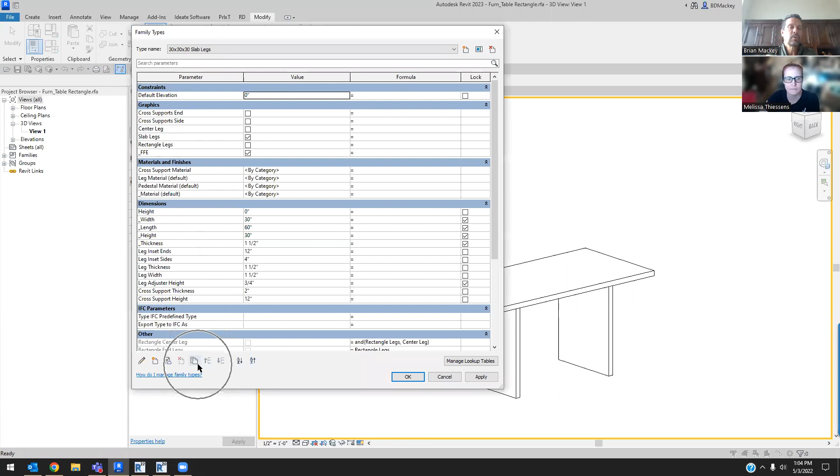So, one of those things is that in the family editor, there's some new things, which is kind of cool to see. Last month, I talked about some of the new features. One of the things that is nice in family types is we do have a couple of new buttons down here. One of those, which I'm really excited about, is duplicate parameter. So if you're like, gee, I just need to go create another dimensional parameter or another visibility parameter, you can just duplicate this and call this, hey, Center Line 2, sure.

Give it a name, but what's cool is it knew it was yes/no, it knew it was grouped under graphics, so you don't have to go through that whole process of new parameter, give it a name, choose the discipline, choose the type of parameter, choose where you want it grouped, was it instance or type? You don't have to do that anymore. Just duplicate parameter, like, hey, what's the new name? I'll put it where I need to put it. So that's been nice as I've been working on some content for some of my clients in 23. Really been liking that one.

The other one is, and Autodesk is still calling this a preview feature, I think. But Autodesk is attempting to take shared parameters and redefine those. And basically they're creating a BIM 360 project for this. So you'll see they're calling it a tech preview. And if you click on this, it's going to go to a BIM 360 project that is your parameter service project that you set up.

So theoretically, you can put all your parameters in the cloud, and then you can actually batch import a whole bunch of those as you go through. So if I go into, I have too many clients. I don't actually think I created any parameters, but inside of here, I can just choose the parameters if they were here. And theoretically, you could grab several of them at once and bring them in. So unlike old shared parameters, you had to do one at a time.

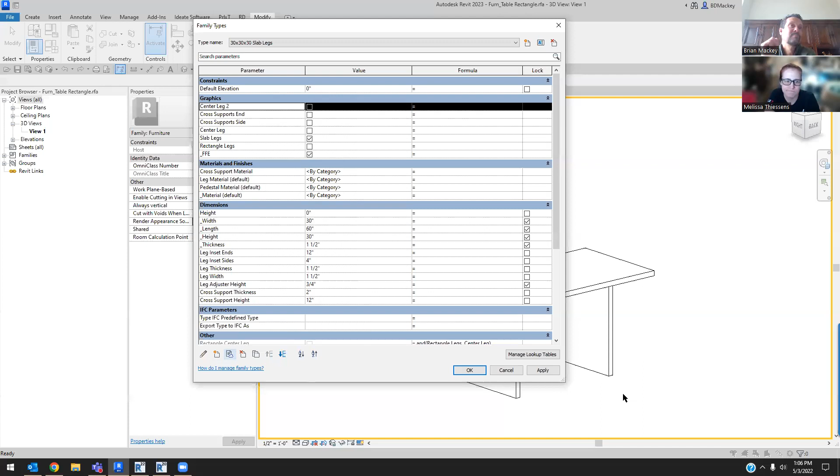You can bring multiples. Right now, that parameter service tech preview is terrible in the fact that you have to define it in there if it's instance or type-based. So basically, if you're like, I want some of my width parameters as instance-based and some of my width parameters as type-based, you literally would have to have width instance, width type. Which I've flat out told the beta, because I've been in the beta on this for a few months, that's just a not going to happen kind of scenario.

Can you upload your current file at least? You can upload your current file to it. Ironically, too, it'll let you create a new parameter of the same name, so you can have 3 different width parameters in there. They don't have to have different names. Yeah, because that's got a different GUID. Again, it's a tech preview, as I air quote, you know, it's a tech preview when you get into that.

The other thing I did want to point out, and I think Paul Aubin is the one who showed me this back in Revit 2019, we've had this enable cutting in views for particular families since 2019. It might have been 2020. It was actually structural connections. When they introduced structural connections, they gave us this capability to make this family cuttable in view or not cuttable in view, right? So historically, and this is an old furniture family that I've got set up, furniture families were not cuttable. So if I go open up this old family that I've upgraded to 2023, this is unchecked because it had not historically been able to be cut in views. But now we have the capability to say, yes, if somebody sections through this table, I want to see it as a section, not as an end or side elevation, right?

So that was something they opened up in 19. I don't think they did anything with it in 20. It might have been they opened it in 20. I forget when structural connections came out. But in 2022, they added a few new categories that had it. But in 2023, they've added the capability to add that to it. So if you are just like, hey, I'm going to go upgrade my library to 2023, there might be some edits you want to do looking at the enable cutting in view if that's something you're looking for, right?

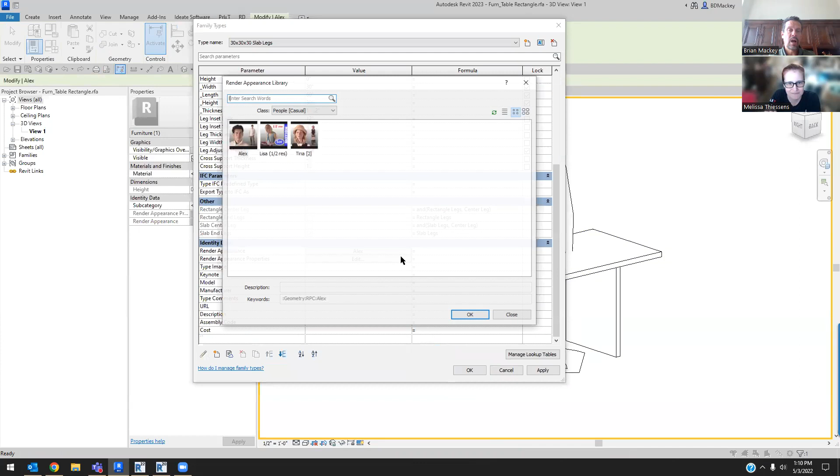So even though I'm in the furniture family, you can see I've got this little entourage family, and it automatically sets it up as render appearances, and it automatically associates those to a parameter where you can say, no, I don't want you to render it as Alex, I probably want you to render this as a furniture, a coffee table, sweet. And then you can start playing with some of the properties.

There's stuff on that from Enscape and things, right? Yeah, I think Enscape does it slightly different, because Enscape has a tool called the Enscape Asset ID. And therefore, when you go to render, if there's a parameter called Enscape Asset ID, it'll go browse to whatever unique code the Enscape asset had. So yeah, it's kind of weird.

And as Simon said, RPCs have been out for a very long time, and it's really, really difficult to create your own RPCs. You can do it. I know CTC for a while was creating their own RPC content. CTC tools were mostly people and stuff. So yeah, there's a capability to do it. And even Enscape allows you to create your own RPC content for rendering purposes. So it can be done, but it's definitely not simple to do.

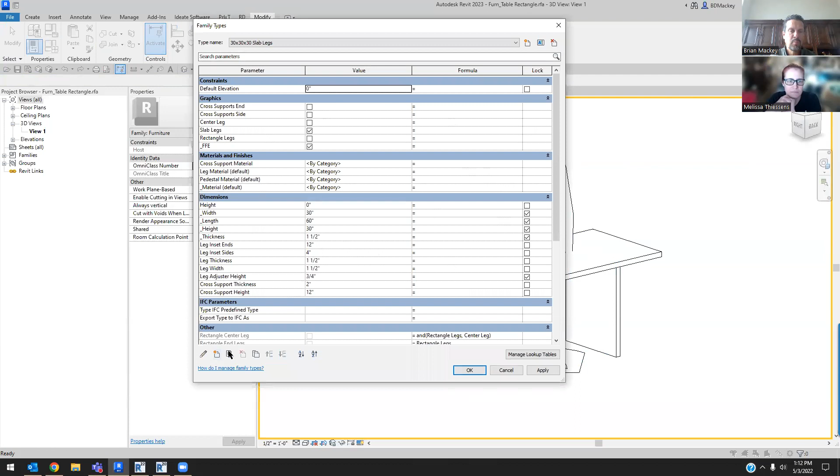Most people go into families and they start looking at the family types and new parameters, new buttons down here, etc. Just want to point out that you might have new properties just in the overall properties of the content itself. So start playing through and looking at that when you get into it as well.

While we're looking at this family, it occurs to me that on the list, there's the fact that we can see filled regions in 3D now. Oh, the fact that we can create. I think it was more the fact that you can actually create filled regions. So in our model families, we've only ever been able to do masking, hence why we always nested detail items. So we can now do filled regions inside of here. So if I wanted to get rid of the table rectangle, I could do my own filled region in here.

The other thing that is new is a type property. In the type property of the filled region, for the foreground pattern only, you can create a parameter for that. Okay, so you can decide how you're going to do this, right? So you could have a detail, I keep saying detail components.

We've all seen my detail components sessions, that I could literally just have one called my line-based family, and I could swap out the hatch pattern to concrete, to gypsum board, to whatever, and I could have one family that would be all-encompassing of everything, and literally it's just swapping out the foreground pattern. Doubt I'm going to go down that path, but this is something they gave us, and I have no idea why. I mean, what large company had been requesting this? Autodesk said, okay, we'll give that to you. I would much rather be able to swap out a profile family than swap out a fill pattern, but whatever.

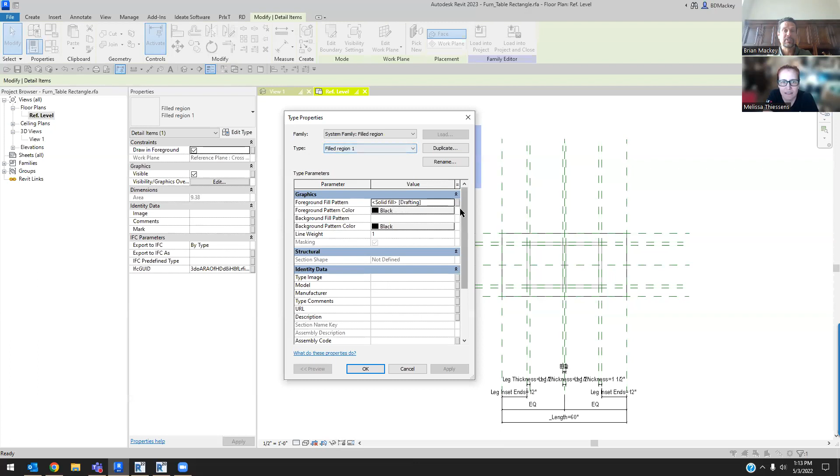Yeah. Yeah, so I thought that was pretty bizarre that you actually could come in here and change the solid fill, or change the fill pattern. So you can now just in your family call it filled region, give it a parameter and change it out if you wanted to. I've never been in a situation where I'm like, oh God, wish I could have one family and swap out that fill pattern.

And the only time I ever had that was I'd created a detail component for one client who wanted all the different bar sizes to be a different color. And I tried suggesting just use filters in the project, but they wanted it in the family itself. So if I could have just had that and then just changed the one pattern there, as opposed to literally I drew a filled region for every size, 10M, 15M, 20M, 30M, I had like 19 filled regions on top of each other, this would have been that scenario. But that is the only scenario I can think of where I'm like, oh, this really needs to be something that I want to do.

It looks like there were some comments that came up on what I was talking about. So is it Carrie or is it Garfield? Yeah, we're just going to say Carrie.

Is there an advantage of using a generic asset material versus a non-generic material? Oh, okay. That does not help self-illumination, etc. So I think what he's talking about is when you go to the materials, and I don't know, Melissa, do you have a thought process on this? When you start looking at materials, you're going to see that you've got these materials with these little crazy little triangles on them. Yeah, the old stuff. And this is the old materials. Ironically, all the Enscape users say they like these materials better. So I know a lot of the people doing Enscape use these old materials, but if I come down here and go to the AEC materials and I just load up a new one, you're going to see that this new one doesn't have the little triangle because this isn't any longer one of the, I forget what they're calling it. They call them like layer-based versus, I don't remember.

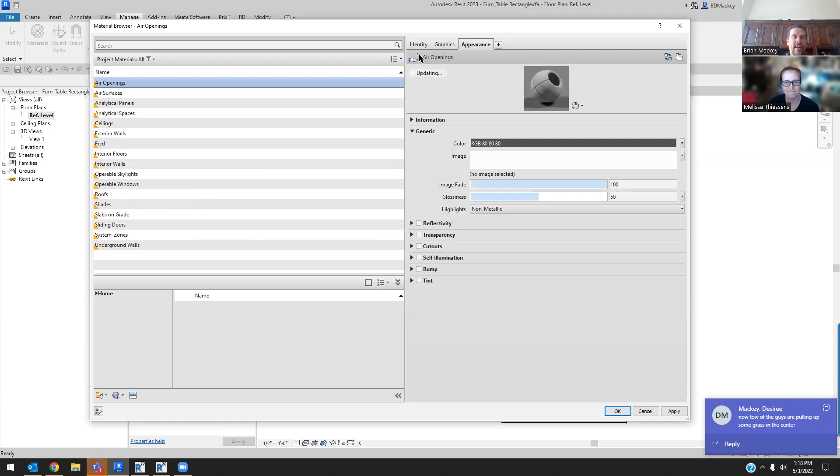Since we're on materials, one of the 2023 features that Simon just put up there: it used to be that when you duplicated a material, it would duplicate it using shared assets. In 2023 they've given us the capability to actually duplicate the asset too. If I come down here to Air Openings, you'll see it has a little hand icon and no other assets are using this render appearance. Before, when you duplicated it, it basically shared the asset. So if I call this one Fred, you'd have no idea that this air opening is tied to another asset that renders the same way. If you changed it to render red, you wouldn't just fix Air Openings, you'd also change Fred. So that's one of the new features in 2023.

Learned that the hard way, right? Oh yes, I've had several clients say, I go to render and it changes, and then I go to the other room and it's changed back. What's going on? It's because you're changing shared render assets. So yeah, this is there.

So now you can duplicate the material and the asset together. You'll see I've got Air Opening parentheses 1, even though it's Fred 1 down here. So it does duplicate the asset, as opposed to us having to come up here and separately duplicate the asset ourselves. That was something new since we were on that materials topic in 2023.

Yeah, no, that is fantastic. That's always so confusing to try to explain to new users. Sarah just yesterday had to deal with somebody doing this. Yeah, I deal with it on a weekly basis.

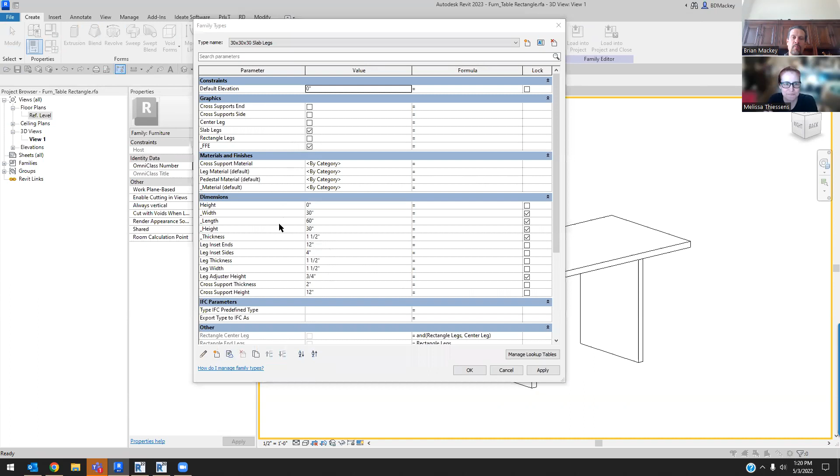So you're an architect, because if you were a structural or mechanical engineer, you would absolutely know what these did. When creating a new parameter, there's this discipline setting. Common is what everybody can use, but if you come down to structural, you can see all these different types of structural options. It's a good question, Rick, because I've been to so many structural engineer offices where they create a number value parameter because they want to put values in kips, and they're like, oh, I didn't know there was a structural option, so they leave it as common.

They make their parameter a number parameter and just start typing things in, and then I get asked, well, it'd be really nice if we could just have it say 'kip' or a 'k' after it. You can. When you switch it to the proper discipline, you can then come down here and, say, go to Force, and start looking at the formatting - this is going to be linear kips, this is going to be whatever. You start changing all the different values here, and then you can use those formulas as you get into it.

There's the weight value down here for warping constant, there's MEP stuff which I have no idea what any of it means on the MEP side, but this is how you get to your airflow, your density, et cetera. So this is what the discipline field is for.

What was that, Melissa? I have at least some idea on some of those.

Airflow, I feel like you know what airflow is? Airflow density? Nope, don't know any of that. What to use it for, but it's never what it is, right? Yeah, that's what's funny. I'm always flow per power. I'm gonna start using that in all the things. Flow per power. Yeah, agreed.

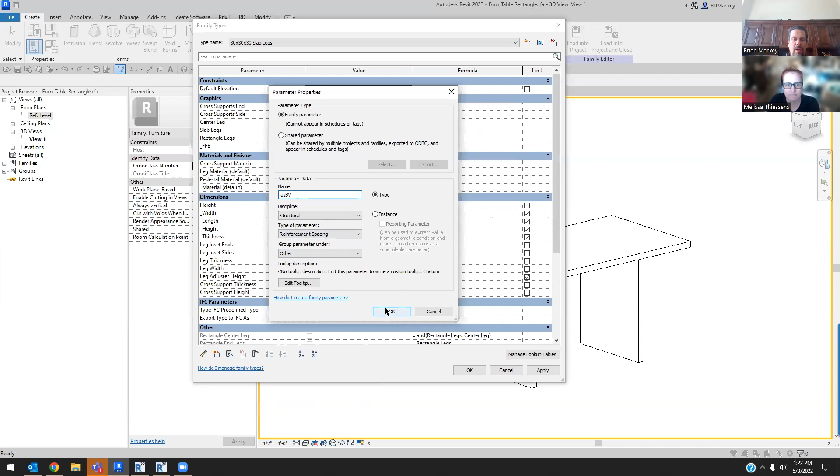So one of the ones for me, I think also under structural, you have something for reinforcement, if I recall, so you can get reinforcement area. I had one client who was just trying to do reinforcement spacing, that's one of the values you can put inside of there, and that's my parameter name. Now when I come down here for this, it looks like dimensions, etc., but the nice part is it's going to be similar to a length value, but this can be used in formulas in different ways. So that is what that stood for, Rick.

So does that tie into the discipline in your view settings? No, not in any way, shape, or form. Okay, just thought I'd throw that out there too.

When he first asked that I thought he might be, and so I do want to point this out. It's not necessarily discipline, but when I first read Rick's question there are certain tools, and I'm not sure if there are any in the MEP, that actually have this up here, which is really bizarre. So if you're a structural engineer, if you come up here and look at the materials for model behavior, you can assign a concrete material to an object, but you can come up here and say this is steel.

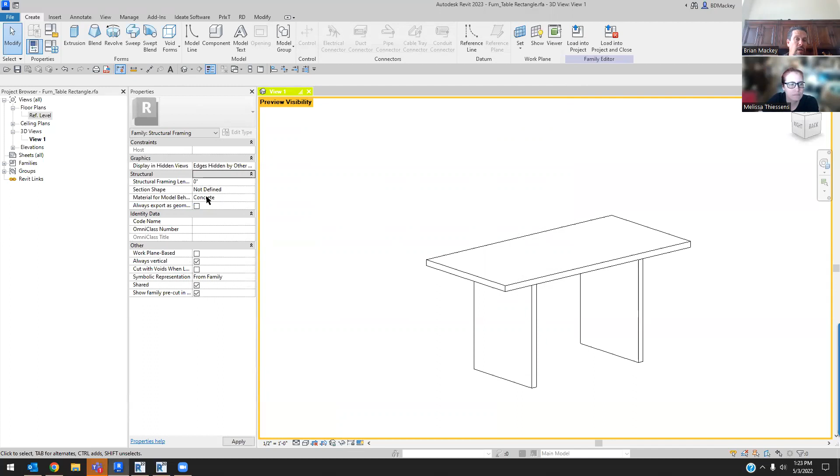So for all these structural families, you see this material for model behavior. This is how, A, join conditions are going to happen between beams and beams or beams and columns. But B, if you leave it as other or concrete, once you do it as concrete, A, you might get a different tool up here. Like now I've got Display in Hidden Views, but also it'll now allow rebar or reinforcement to be placed into it. So a lot of those different things start happening, and you can see just by changing the material here, I'm getting different properties as I go through looking at this family.

The other thing that becomes really bizarre is if I make this steel, then it asks for a section shape. So if you're a structural engineer and you're trying to use any of the steel connections tools, if you don't define what that structural shape is going to be here, these structural connections will not work. And once you choose one of the ones in here, let's just do a...

That one, C-channel Sloped Flange shape. Once you do this, it then automatically associates all of these parameters in there. So these structural parameters were not in here before, and it does need to use those tools for these structural connections. And from what I've been told, it uses all of these values when exporting out to analytical programs too. That I don't know, but that's what I've been told.

So depending on what you do in certain things, they can even add a crap ton of different properties over here, again just based on what you see and what you're changing out over here. I think there's some tools similar to that in the MEP families as well. Could be incorrect, but I believe I've seen some of those.

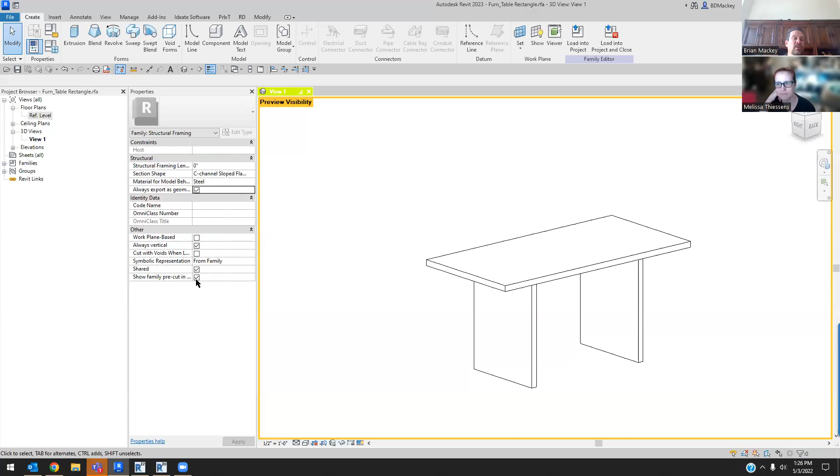This is a bizarre parameter in structural content, and there's something similar architecturally - I think when you start doing multiple nests of doors it acts the same way. But what this actually does: take cross bracing or a slanted column. 'Show family pre-cut in plan' means it won't show the family cut where it's physically cut in the 3D model, but where the view range is set inside this family. So if you have a structural beam or column sloping and want to see where it hits the ground, you need to go into the family, go to view range, and set it to something like half an inch. Because if your view range is at 1 foot, 4 feet, or 6 feet, that's where it will show the slanted column cut, wherever the view range in this family is set. It's bizarre because nothing tells you that - the tooltip just says 'cut plane: either the family or the view,' which doesn't explain anything. That's what it actually means, and by default it's turned on.

So many times I get, like you said, somebody puts a cross brace in and it shows incorrectly, and everybody asks why it's showing way up here when I'm cutting through it right here. It's that stupid 'show family pre-cut in plan view' checkbox.

Yeah, we kept getting red lines saying you can't have a door here because there's a column. No, really, the column is up here and the door's down here - up here and down there. I promise, here's the elevation. Yeah. Cool, good times, right?

Let's see, doors, stairs, okay, we'll go with this one. So this one is looking for a quicker way to make a laser cut air terminal that is also an LED light fixture in a family.

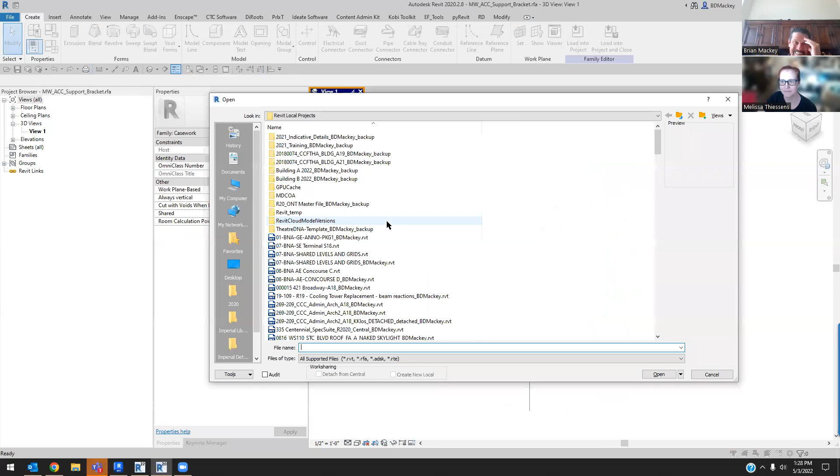Oh, I have one of those. Well, there you go. Now I just got to remember it won't be done in 2023, so I'll go to 2020. Now I just got to remember what the client name was for that - when you get into that, it's going to be nested families. Oh my goodness, what was the client name? It's not that I don't know where it is, I just don't remember the client name for this. Yeah, it's fun when they all start kind of blending. You're just name dropping and showing off. Oh no, I'm not. Was it these guys? Nope.

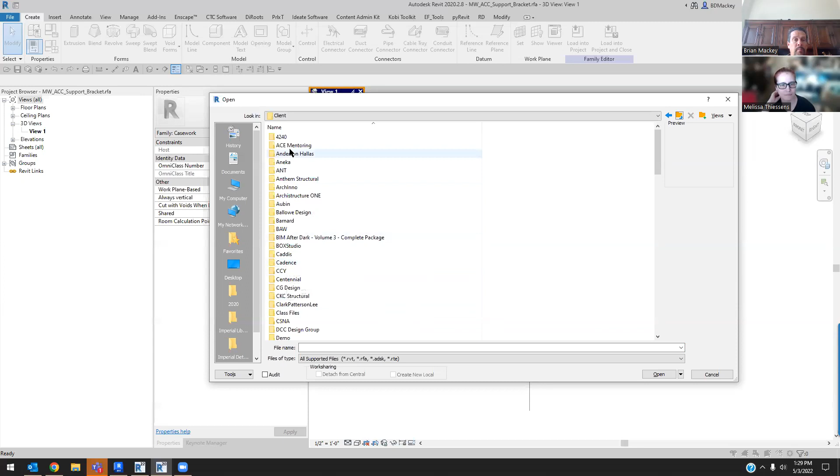I don't remember, but basically what ended up happening is I went through and created a light fixture family that I then nested into my diffuser family. So the light fixture family itself was a shared family - I had the shared checkbox checked. So when it got nested into another family, it would still schedule and do everything it's supposed to do.

I have a whole... that's not right, is it? No. I can't think of who it was.

I hate that when you go back, it doesn't take you where you were. Well, I can't find the family - I have a family for those. Actually, I have a whole entire exam room for it.

So yeah, when you get into that, that's exactly what you need to do - create your light fixture family, then nest that light fixture family into it. Mine, I believe, had a length value because they had LED all along the outside of that air terminal. It went into a whole exam room when you got into it. So yeah, I just can't remember what client I did that for.

Well, that would make too much sense. Synergy, yeah, that's who it is. Huh, you'd think the word 'medical' would help. Let me find the family now.

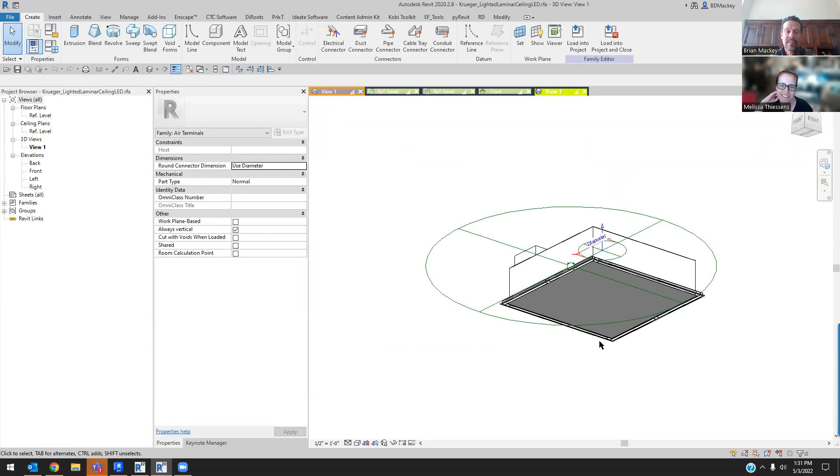Not the lighted laminar ceiling. Yeah, I think it's this one. See, it's been a few years, so it's not terrible. From Revit 17. Yeah, so if you get into this one, I think this is what you're talking about. So this is obviously the diffuser. I even put some sort of hatch pattern to look like a diffuser pattern.

And then this is a nested family. So if you look at this, this is my LED light strip that went inside of here. So if I edit this family, this is my LED family. It's shared, right? And if I go to a floor plan, it's just got the length parameter here. So I've got a length and I've got my little depth and did whatever I needed to do for this. And then that was loaded into this family.

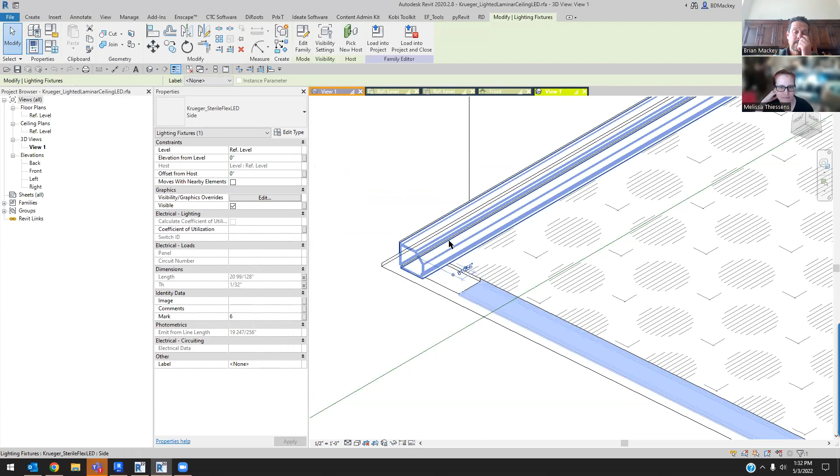When I loaded it into this family, that length parameter was a type parameter. I don't remember why I did that here, but it's a type parameter. And so you'll see in that type parameter, where's length? No, actually, it's got to be instance-based because it's shared. It's got to be here. So sorry, here we go. Here's the length parameter. And then that length parameter I mapped to a formula that said, hey, here's the end length. And then there were going to be side lengths as well, right? So it just kind of went through and mapped into all of those.

Since those were also shared, they do have a light source. So this is true of any light fixture. If you're trying to create, for lack of better terms, a track light or a multi-segment or multi-piece pendant light, the pendant itself needs to be a nested shared family. So when you load it into a family that has 5 or 6 of those, every single one of those has a light source. So that's kind of it. And I still just made this as my diffuser.

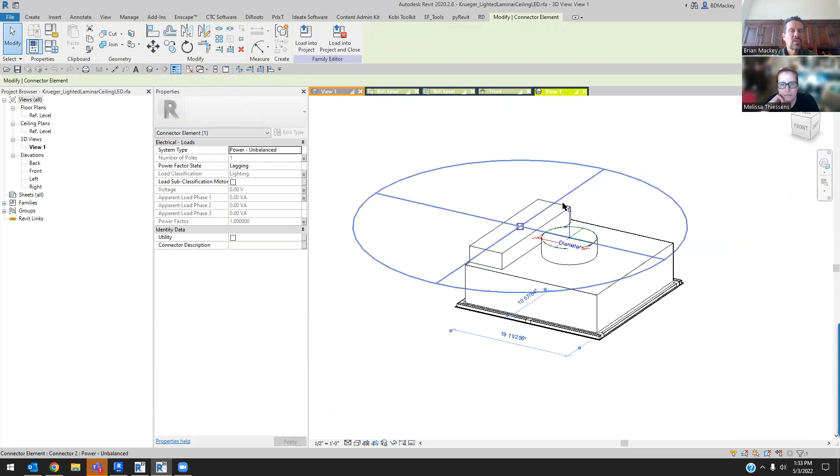I do believe that this even had a connector on it. I just don't believe the connector was showing. So we could still hook that up to the electrical as well. Or maybe, no, I think they said they didn't want that in this one. I think one of these is just my electrical connector. So you've got the diffuser connector, and then inside of this family I did the one electrical connector because that's how this fixture was set up. So I didn't put any connectors in the LED strip, but I did put just one connector in here to represent that and set it all up according to how I was told, because I don't understand any of that.

Airflow. It did, yeah. I even got to use an airflow parameter and all of those fun parameters. See, it comes full circle. Look, I've got my flow, all of those fun things inside of there. So hopefully, Garfield, that answers your question. All right.

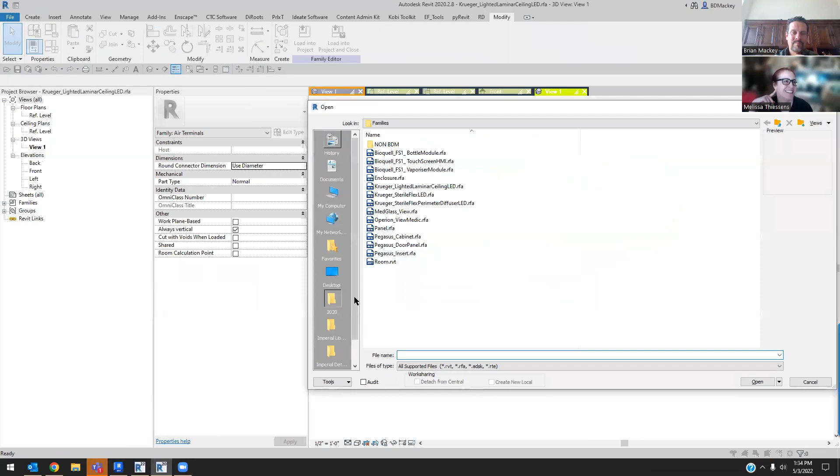So let's go to a kind of stair problem. Do you have any advice for adding a ceiling, like a drywall ceiling, to the underside of stairs easily, other than manually figuring out slope or top and bottom height for a slope arrow? Yeah, personally for me now, the biggest thing is if you are trying to use quantity takeoffs, now this might be fixed in 2023, I honestly can't remember if it was or not. But for me, when I do this, it's a handrail.

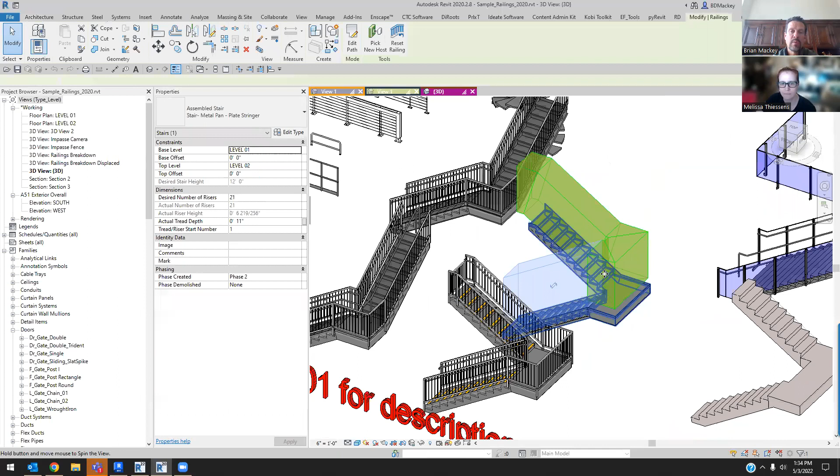So this is one of the things that when I'm talking to people, everybody's thinking a handrail is something that just starts going up. A lot of you have probably seen this sample handrail file. I get into it quite often. One of the handrail types I have is basically one that gives me head clearance, right? So this one I can put a handrail on just to verify, do I have the proper head clearance?

Well, there's no difference between this handrail and my handrail underneath this stair, other than the fact that this one's got a different material and it's only 5/8 of an inch thick. So this way, when I go through and do it, this is just simply a handrail. It will follow the slope of the stairs automatically. You'll see it's a railing, it's called gypsum.

If I go to the type properties of this, it's 5/8 of an inch thick. It's got a rail structure where I've said, hey, I've got to figure out the height of this for the profile offset to match, to get that rail from the top of the stringer to the bottom of the stringer. So there is a property set you've got to play with in here. And then it's just using a profile that's 5/8 of an inch by however wide my stair is, and then a material called gypsum board, right?

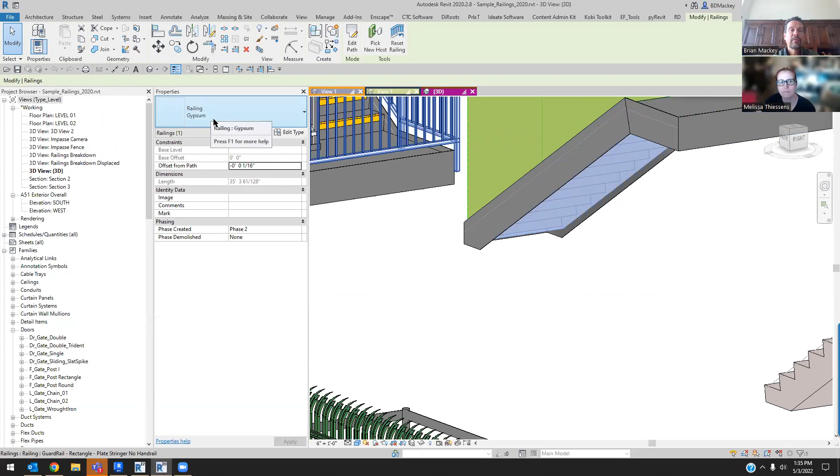So if I had a 4-foot wide stair and a 6-foot wide stair and an 8-foot wide stair, I would have my gypsum 3-foot, 4-foot, 6-foot, whatever. Each one of those would need to be a different height. But you'll see that I do it as a handrail. And if I do come through here and look at this, you can see that it does go all the way up. I will end up with weird miter lines like here and here. I don't know why, it's the handrail trying to miter around, so it gives those to you.

It's still flat, so it's just bizarre that it actually draws a line in there, but if I'm in an RCP or wherever else I'm doing, then I just use the invisible line tool. Kind of a downside. Now, the other thing that you may have to do, depending on the design of your stair, is if I edit the path for this handrail, you'll see that some of these need to have a height correction. So this one has a height correction of 3 inches.

This one doesn't have a height correction, right? So that negative 10.5 or whatever the value was in the offset of the profile got me to the underneath side of the stringer. But once I got to landings, it wasn't the right height. So you can grab individual sketch modes if you need to and change it from by type on the height correction to custom. And it looks like the only one I had to do that on was this one here. So I just did custom on this one.

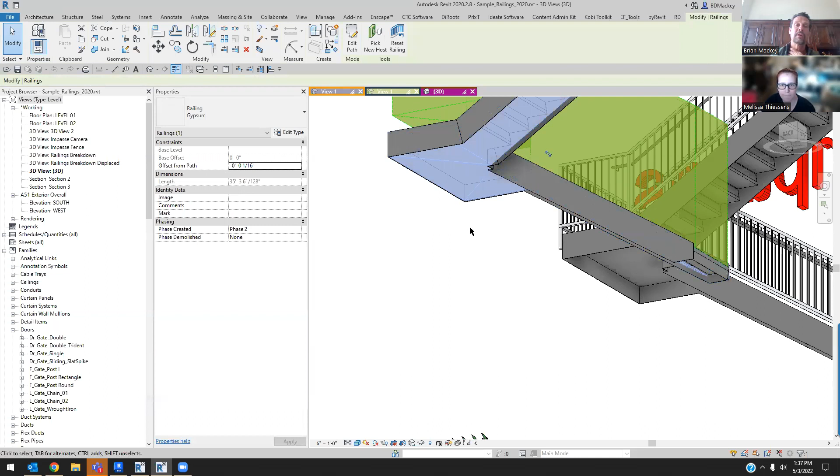Downside to this, it will not schedule quantities. So if you're trying to get your gypsum board takeoff in quantities or whatever, it will not do that for you. 2023, I can't remember if they allowed materials to be scheduled from handrails. They added so many things I can do to schedule, I forget if this was going to be on there or not. So just a heads up, it may work in 23, but prior to that, it definitely did not do scheduling. It'll look pretty, right, when you're walking around.

But it looks pretty. You get the great rendering. You know, I made it go inside my stringers. I've done this for several clients where it's more of a residential and it's just a 2x stringer and they put it underneath and outside. So yeah, like I said, the only downside is you might have to play with that height offset correction.

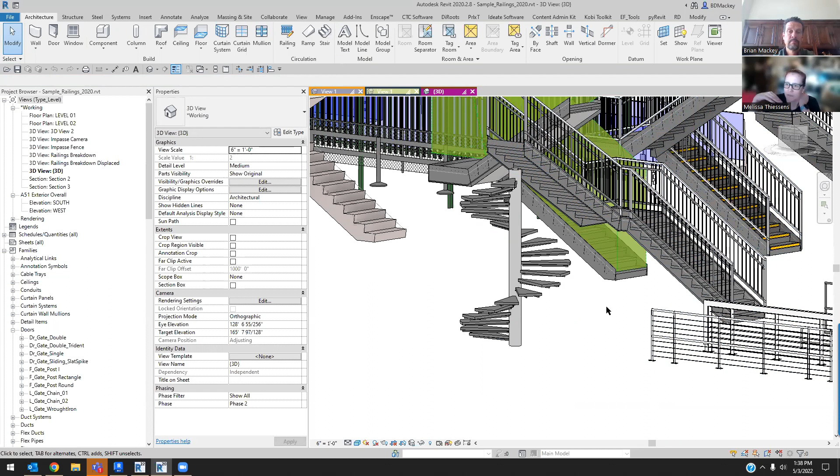But again, cut a section, do a distance, edit the path, put that value in there, you're done. So it's not like it's rocket science, and then I don't have to figure out all the goddamn slope arrows and try to do this in sloped ceilings anyway. Much easier in my personal opinion, just to do it as handrail. And then as a railing, you could also, if you have a multi-story stair, right? Yes, so there's a railing. If I did a multi-story stair, it would do the multi-story railing with this.

I'm not a big multi-story railing person or stair person, so. It's better than it used to be. Better than it used to be, and it's great for schematic design and design development, but rarely do I keep those when I end up getting into construction documents, because there's just usually nuances at every damn floor that I need to play with.

Just since you're on the stairs, I was just trying to figure out, so it looks like you didn't start with a tread on your second run. I'm just wondering, because a lot of times when I do those stairs, I will just slip the tread.

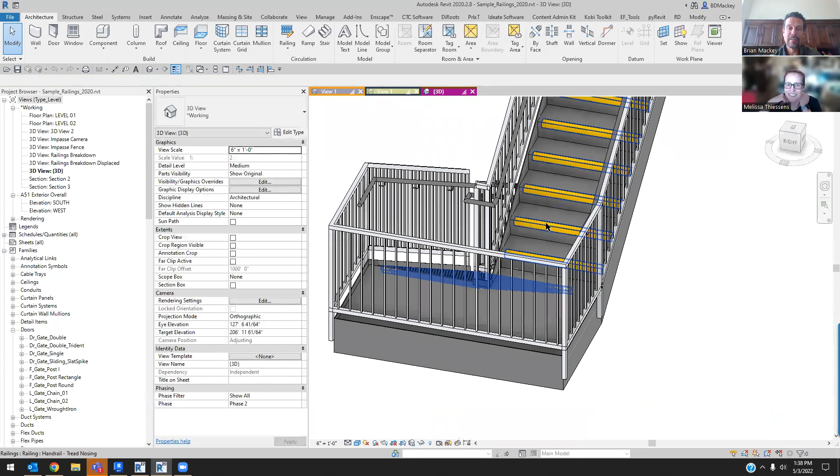Oh yeah, so use the tool that nobody knows, that when you tab select to get a run, or when you're creating the run, you have that. Begin and end with riser thing. Yeah, you have this checkbox over here that is begin or end with risers. Like up here, you can see I did not end with a riser. I did make this just be flat rather than having a riser go up. You do have that while you're modeling a new stair.

So if you're in the stair command, and this is one that I think must have been editing path of a handrail somewhere. So when you're in the stair command and you start drawing a run, I think one of the things, come on.

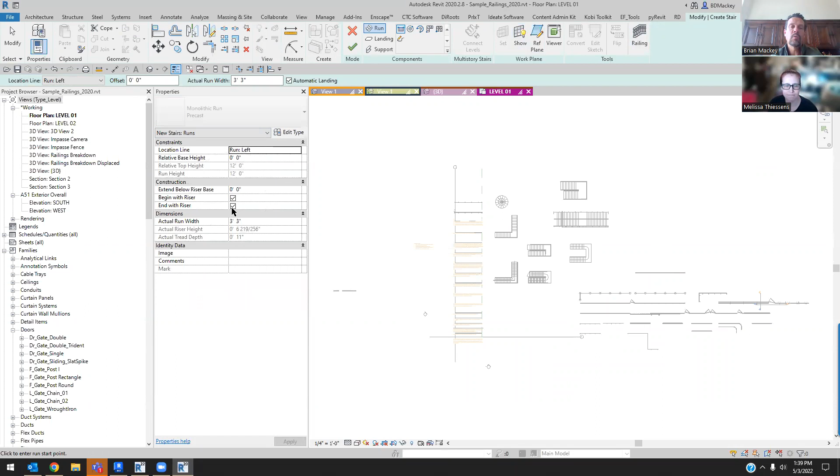One of the things I don't think people understand is when you're doing a stair, the properties you see is the overall stair, but you can also see it of each individual run. So you can choose to begin or end with that riser on each individual run as you go through. So most people don't ever hit the properties filter over here, but you have that capability, like, oh, sure, I don't want to start or end with the riser on this one.

I always forget, and then I end up changing it after the fact and having to adjust. I always do it once and then forget I did it, and then go draw all these stairs where I didn't start with a riser. Like, damn it, I drew all the stairs in this project without a riser. Son of a. So yeah, that's kind of my downside on that one.

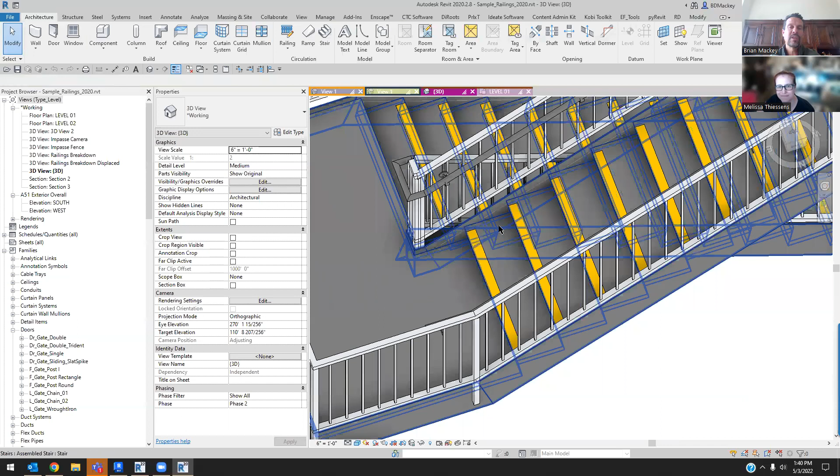Just all the fun tricks you have to do to try to get your railings to not do the dumb thing at those joins in the middle there. Yeah. The other thing, this was one for a particular client that wanted to show the luminescent tape for fire things on the stairs, but I didn't want it to run all the way across, right? It was in the stair. We could have done a stair nosing profile and used that. But in this case, again, this is just simply a handrail.

Same scenario as before. If my treads were higher or deeper or shallower, then I'd have to create a new handrail type for this, but a nice little thing to do. And yeah, it doesn't give me the one reflector strip here. I don't really care. Somebody's that worried about, you're missing one, and then I don't really care.

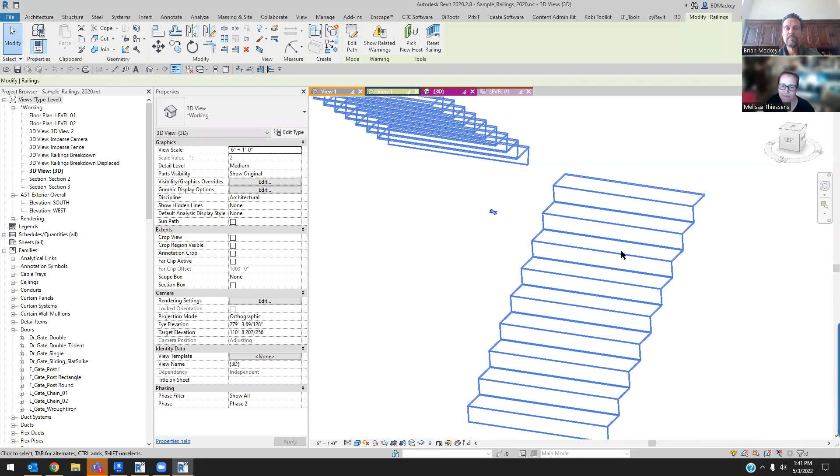And ironically, I then took that one to a client who really wanted to show the full material all the way up the stair. And all I did was take that baluster I had, instead of being 2 inches deep, I made it 11 inches deep. So again, this is also not a separate stair, but just simply a railing to represent the finishes on that stair. Thanks.

All right, let's see if that was our stairs. Should we move on to doors? Sure. Yay, doors. Okay, Sean says, I'm making my first door family to create frost stoops. Is there a way to add items to the door opening that would heal the interior slab on grade so that the floor slab doesn't have to be edited to fold the slab edge into the door opening? I tried, but not being able to join the opening to the floor leaves a line between the opening slab and slab fold and the floor slab.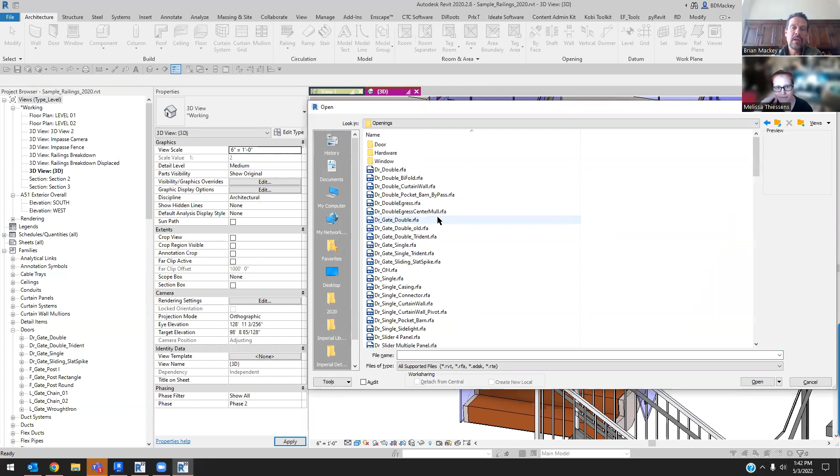No, there's not, unfortunately. What I do in all of my door families, because I give my families to a crap ton of interior people, and it drives me crazy when I see interior people draw that floor finish centered on the wall. It's like, well, no, technically it would be centered on the door leaf itself. So for me, and I'm very odd on this, I end up modeling in a reference plane that I do have as a weak reference that is literally centered on that door.

So if you wanted to do something similar, you're not going to be able to build it in and join it. But if you wanted to do something similar, you can see that I've got a reference plane right here. Now that's the face of the wall. That's my material return. Hold on, let me go through and show a stupid number in those. Material return, 4 and 4.

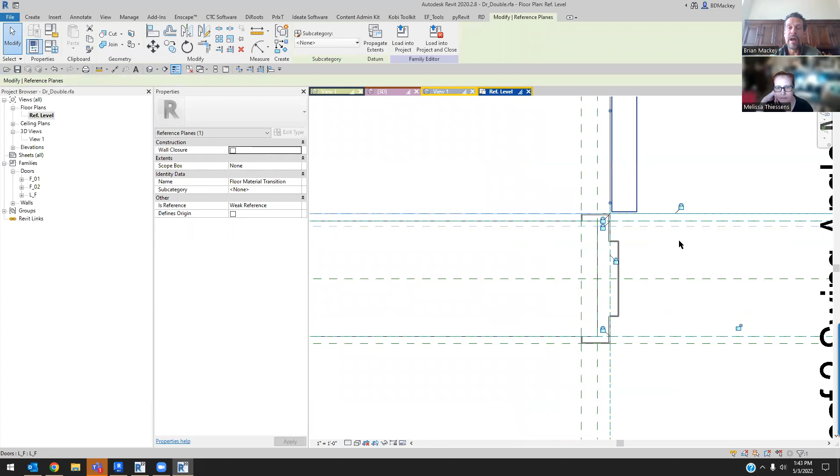So I think it's this one. Yeah, this is my floor material transition. So I created a weak reference plane that is literally half the thickness of my door leaf coming from the face of the door. So if it moves in or out, now my interior architects can use the align command or pick command and draw right to that center reference plane. So at least they're going to have something in there to line it up.

So you could do something similar, Sean, where you can have it in there, but no, you're not going to be able to create an extrusion in the door that would allow you to join it to a floor. So that's all I got. Possibly create a reference plane to help with that tool, but that's literally all I have. That's also honestly why I don't ever model these.

Theoretically, the floor finish would probably go right to the inside jamb edge. I usually try to go to like the underneath side. So if somebody shifts the door a little bit, at least I've got this reference plane I can go through here. So I add some extra reference planes to my door families that literally do nothing in the door family. They're just there for the interiors people.

We've been having a few clients ask about thresholds and having them actually modeled in the door family. So we've been kind of going back and forth on, is that just way too much? Is that going to drive people crazy? Are you talking like exterior thresholds or floor transition thresholds? With ours, it was both. I assumed on Sean's question, because it was a front stoop, I assumed his was specifically exterior.

Yeah, I've gone rounds on that as well. Yeah, I would like to have that built in as part of the door, but then again, now I'm modeling that into the door and I don't use it 80% of the time. Right, because a lot of times I either don't have a threshold on the material transition, or B, it's the same material through the office into the hallway or whatever else.

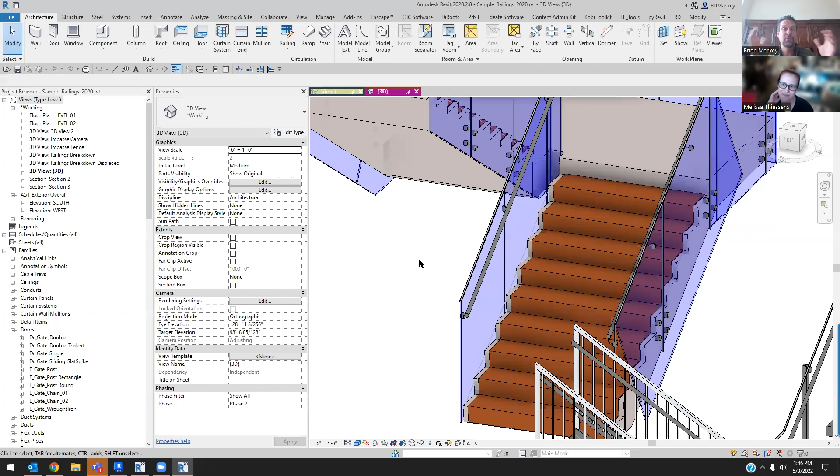And like with the doors too, I have with my cabinets added and swapped out the hardware, but with doors, I know you guys have some hardware in yours, but it's just so different. Then am I modeling in the option for a kick plate on both sides versus the hardware on both sides? Is it pulled? Yeah. Where's the closer? The closer could be on both sides. It's all these different things. Every time I try to do this to my stuff, I overwhelm myself with all the options there could be. I then just give up and walk away.

Yeah, we even had to do that because we added trim to both sides of the frame families. Yeah, sometimes you'll have trim on one side and maybe not the other side. I was trying to build it all into my one door, and it was getting too complicated, so I just created a separate door family called door with trim. So yeah, there's all those things you can do, but are you overly complicating this in the one door family? Yeah, or it'll work for this one person and it'll be great, but for everybody else, it'll just be extra stuff.

And Michael, I agree. That's why I do model finished floors. Hence I did put that reference plane in there, because then I can put it where I want it to be, but theoretically it should be centered on the door. But yeah, I always model finished floors. And I believe Parallax, you guys model your finished floors as ceilings, do you not? Yeah, I think that's what Aaron prefers.

I liked Revolution Design. He's got one of his plugins, do you have the update floors and manage floors? Yep. You could actually use a floor and set it up, and it puts it in the room and also offsets it by whatever the thickness is. So that's the reason we like it, and the only limitation is not of the Revolution Design tools, it's a limitation of the API.

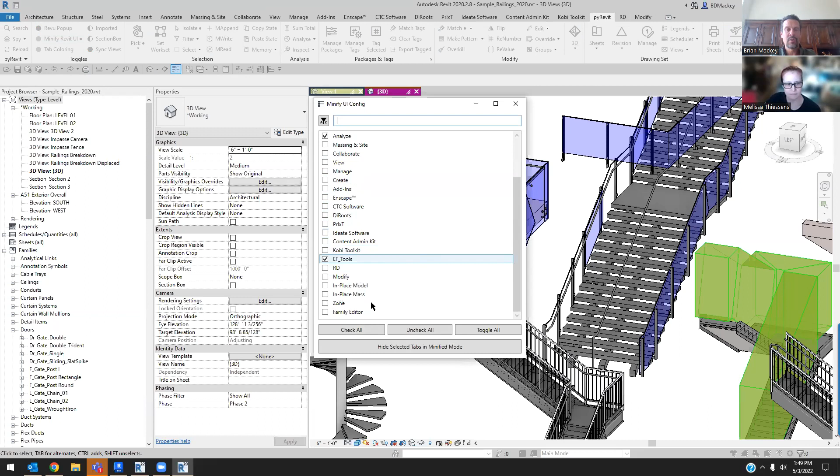So yeah, I know EF Tools has it, and PyRevit actually has one in here that I love too. That's called Minify the Revit UI. You can go into the settings there and choose which ones you just want to hide. So I love the fact that Revolution Design gives the capability to rename it, but PyRevit does allow you to go into the settings and choose which ones you want on or which ones you want to hide. I don't use these on a regular basis. Let's go ahead and hide all of these. So I thought that was pretty cool too.

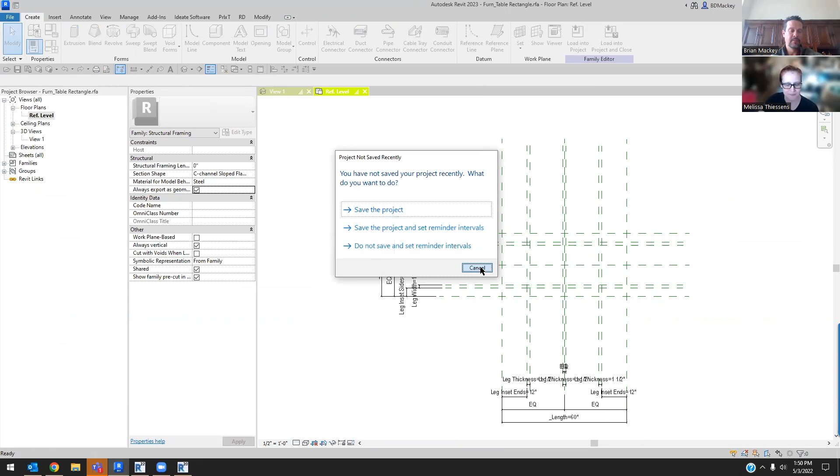All right. So what's the next question? Is it possible to schedule a wall sweep that is defined in the edit type of a wall? Yes, if you're in Revit 23. Newly available. So if I go to a new project and start looking at this new project, that was one of the things that was added to Revit 23, the capability to schedule, filter, and something else to wall sweeps.

So if I then go into schedules and quantities, new schedule, I go down to walls. You've got the wall sweep schedule here. I think you can do this in a previous version. Maybe it's just the fact that you can filter them now. I don't remember. Let's actually go to 20 and see what we can do in 20. Let's go schedules. I was thinking that was in 23, but I've seen it. So yeah, you just go to walls and then do wall sweeps like this to schedule it. Was it tagging?

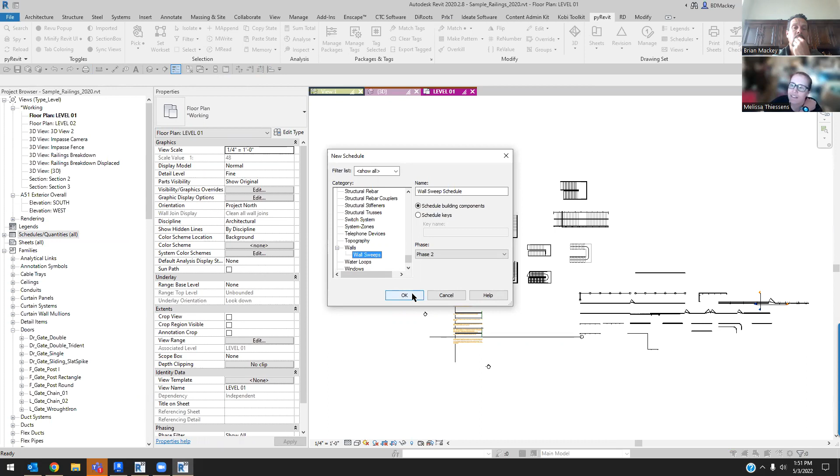Oh no, I think Yasser might be right on this one, that this only gives the ones where you use the wall sweep command. Yeah, that's right. And that might be what they fixed in 23. So let's just come in here and say, what am I even going to put on here for a wall sweep? Oh, so you can do the profile of it too? Type, length, profile, okay.

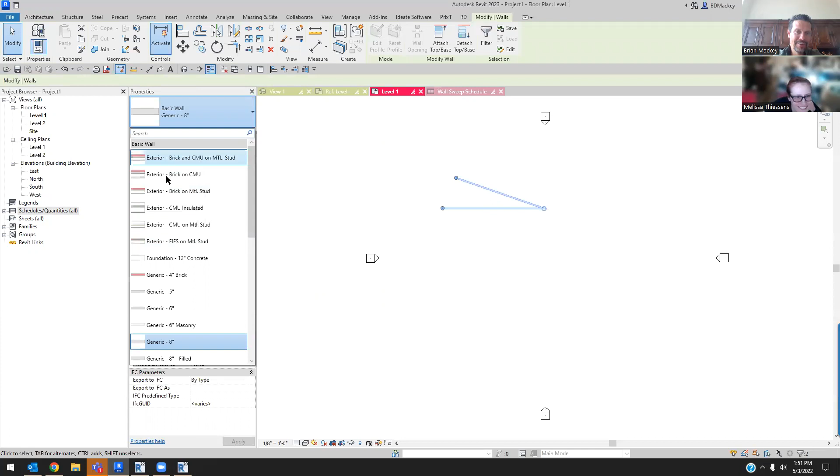Let's go back here, swap these out to be walls that have some sort of sweep in them. Don't one of these have a sweep in them? Is it one of the stacked walls? Well, something they use in the stacked wall. It's been a long time. Yeah, let me use these. Oh, screw it. We'll grab this one. We're going to edit type. We're going to edit structure. Turn the preview on. Go to my section. Go to sweeps. Add a sweep. Sweet.

Let's go back to the schedule. Nope, not there. So the answer is no, because I'm in this. But yes, I think what you've always been able to do is wall sweep like this - I need to be in a not plan view. So we did wall sweep, and that shows up in the wall sweep schedule, but not the ones built in. So no, still can't do it.

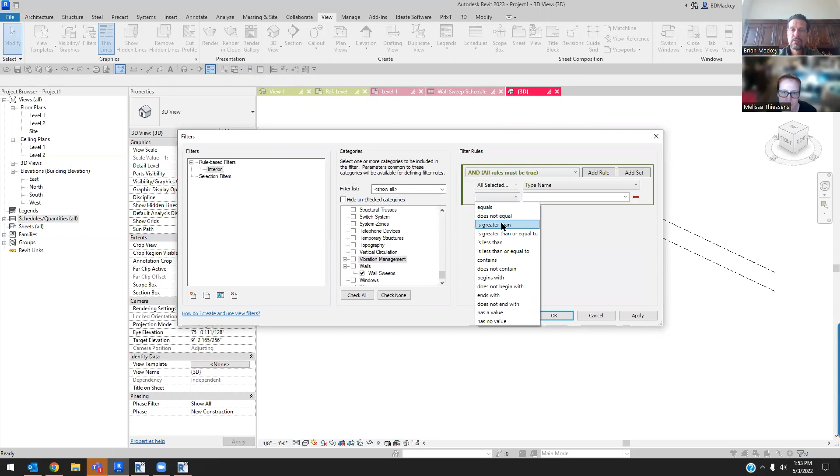I can't remember, they added something to wall sweeps in 2023 - I think it was that you could create filters. If you go to the view and go to filters, I don't think previously you could do that, because we had a question about it. I think wall sweeps got added into filters, so now you can filter wall sweeps. But I'll bet this only works on type name greater than blank. So if you had rubber base as a sweep, you could filter it out. But I still don't think that's going to work on the ones that are built in.

So again, it still doesn't work on the ones that are pre-built in. But at least now, if you can do a global parameter - if you're worried it might move up or down - the after-the-fact glue-on ones aren't as bad as they used to be.

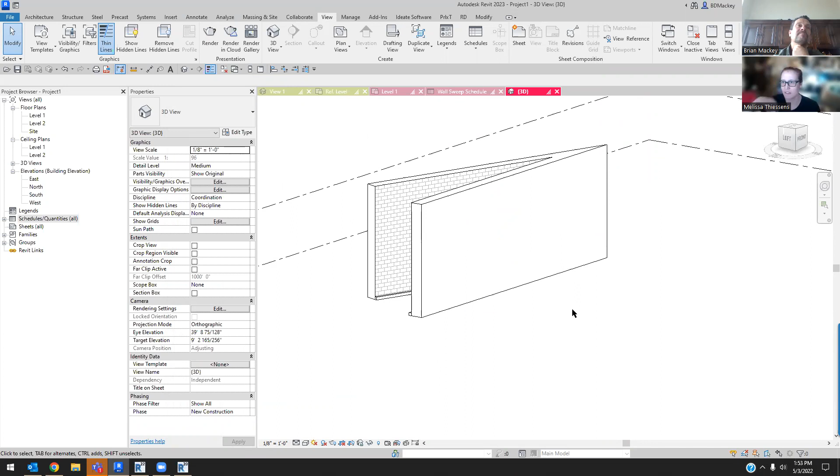And ironically, that's going to be one of my whole sessions at BILT - how to use global parameters for design alternatives, kind of like design options, dealing with reveals, sweeps, and walls.

All right, you can send me my check for the nice segue. Nice segue there, thanks for that. Accidental segue. Thanks for that shameless plug.

So we have two questions left right now from Sarah, and I think they're related. The first one is: I sometimes want or need an arrow with more than two lines - how can I get this? So I assume you're saying leader, and you need more than just an elbow?

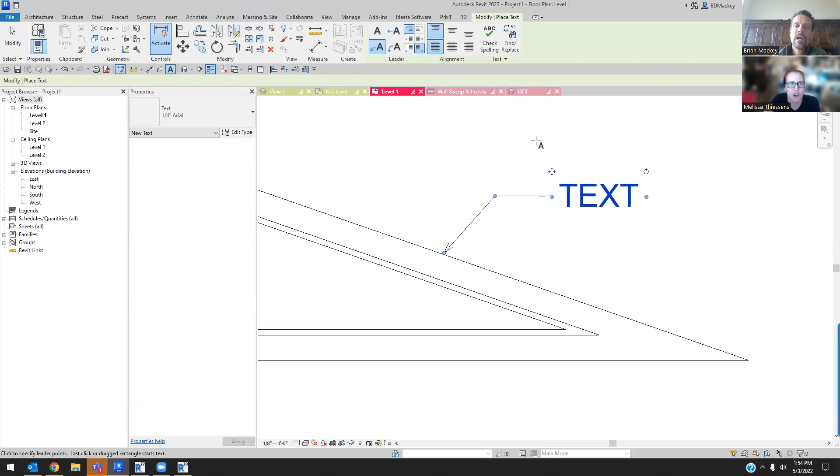What I don't think a lot of people knew is in 2017, when they changed the text, you can go to the leader command, or the text command, and just do this, then hit escape - or is it not escape? I forget, I don't ever do this. Or if you just click - yeah, we got the ability. Oh, you just hit close, I believe. Yeah, you just hit close.

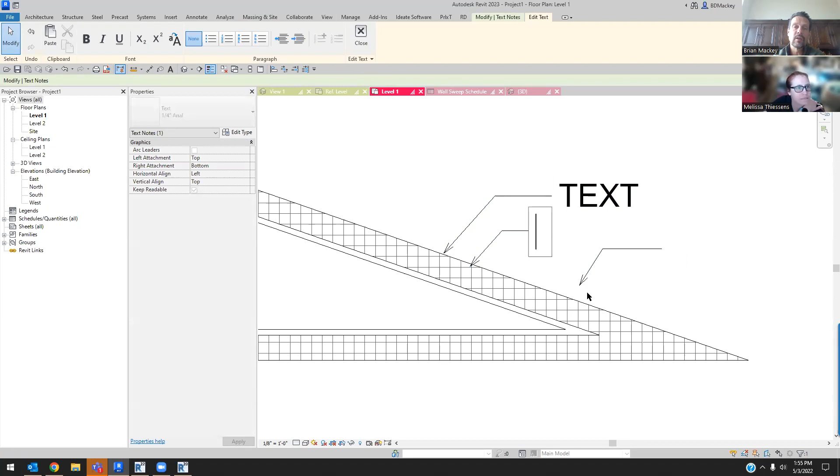So if you're going to do text, you do this, and when the text itself comes up for you to put, you just hit close, and when you hit close you have a leader now. It's just a leader field with a blank text value. So you can do this if you wanted.

If you're talking tags in 2022.1, you can now have tags with multiple leaders as well. But if you're talking text, first off, text you can actually just say add leader - so if you wanted a leader to the left, you could do that. You could do the same if it was a symbol. I believe symbols maybe not always, but they added it - add a leader, add a leader, add a leader. So you've been able to do this with text and symbols for a long time.

In 2022.1, they added this to tags. So if I came in here and tagged this wall, I could select that tag and come up here and say I wanted to add or remove a host. I also wanted to add this host, and it will let me grab an element of the same type. Now I obviously can't add a host that's going to be a door to this tag, but I can start doing both of them.

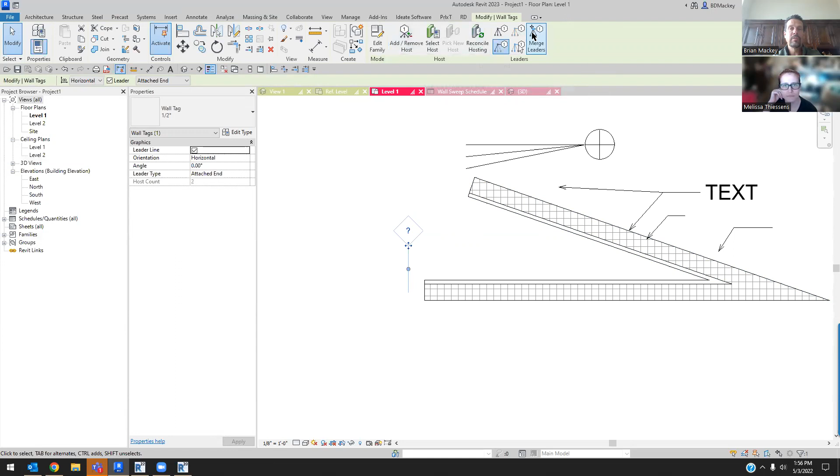This whole merge thing came up to play with them, and ended up being a little bit different in 2023 - I think they tweaked it a little, but you can say, hey, I want to remove this leader, finish, and now it's gone. You have the add/remove host option. I really have never understood the merge leaders, but you've got a whole bunch of different options, and this came out in 2022.1 for your tag. So if you were talking text, you've always been able to do it just by hitting add leader.

If you were talking annotations, same thing. If you were talking tags prior to 2022.1, that was impossible. It is possible now in 2022.1.

She did just clarify, and it was more what I was thinking. She's not saying two arrows were the same one, but she needs more than just the one shoulder. So, oh no, with your host jog, you only get the one shoulder.

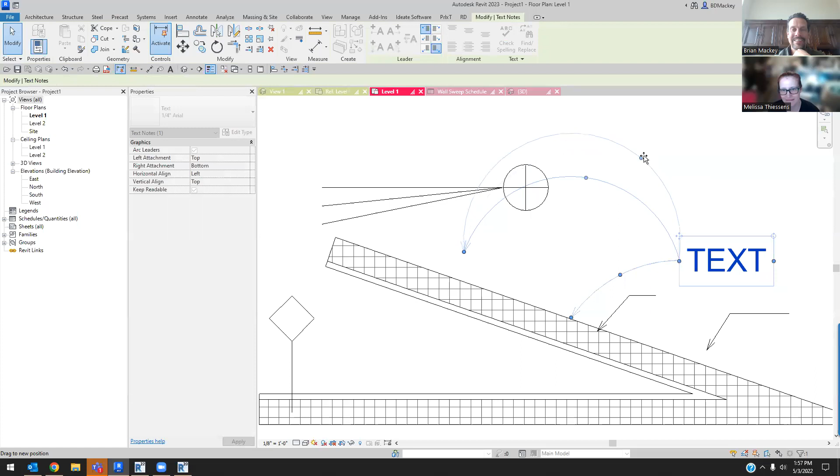Or you could convert it to an arced leader, so you can make it an arced leader and go up and over. It's truly like an arc, like a partial arc. It's not even like AutoCAD used to be with splines, it's like an arc leader.

I have one client who does this, and I'm like, really? But no, if you want more than one elbow, no, you're right. You'd have to fudge something graphically, put the one in that fits, and yeah, that does suck though.

But I guess you could always use a standalone arrow and put that in the same spot and have it go, or put it at the end so you could go to your elbow and then put your other one, which again is fudging graphically. I don't think, and I've just got to look.

No, you just don't need that thing, obviously, so just take it out of your model. Just redesign your project to fit your text. Yes, right, just make your project. About Revit driving your design can go crazy.

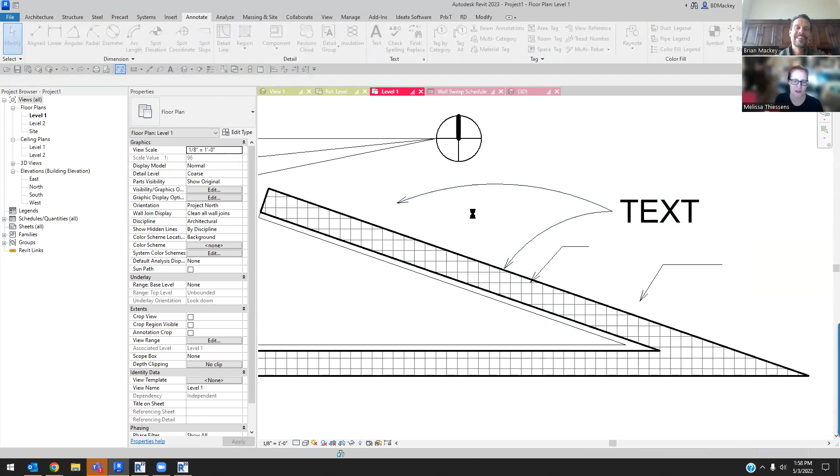Sorry, I couldn't detail that nicely, so I just got rid of it. I just got rid of it.

Yeah, I just wanted to check to see if I knew they added in 2023 some family types for generic annotations. I was going to say, could you do it as a modeled adaptive component line? But they didn't have model lines all over the place, so never mind, it's a terrible idea.

See, my solution is so simple. Just get rid of it. You won't have to note it anymore. It'll be fine, no one will notice.

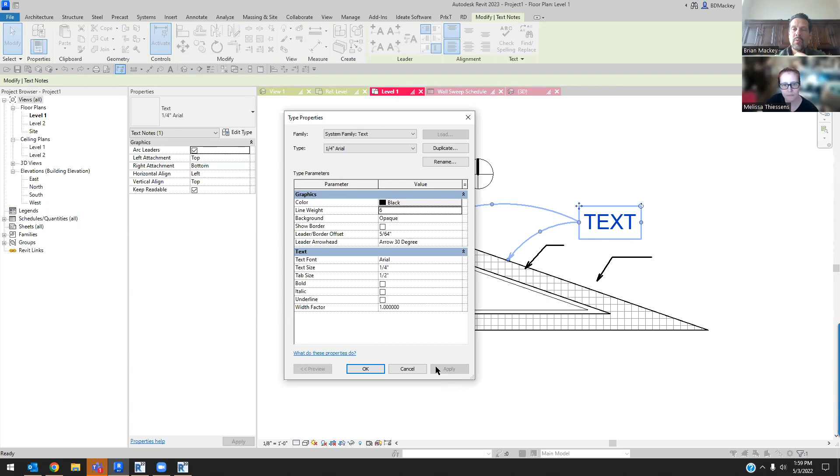Follow up on that is, where are the leader line weights assigned? Because they do seem to be visibly different from Keynote leaders. Yeah, so when you add text and you see there's going to be a line weight, the line weight is not the line weight of the text. The line weight is the line weight of the leader.

So it's very bizarre. When you edit your text, you're going to see line weight up here. This is the line weight of the leader, unfortunately, as well as the arrowhead. So if you're even doing an arrowhead that's simply a dot, you'll see that, well, it's not a dot, I thought I chose dot. If you grab dot, it's going to be the same arrowhead as the dot, even if the dot's filled. I think the dot actually might have a hole, but yeah, so that is the line weight of that.

So if you're coming down like, no, let's go back to a line weight of 1, and you say okay, you'll see the dots are going to get a little bit smaller too, just because of the line weight for the dot itself.

Well, if we go through the line weights through manage, is that one using the annotation line weights or the? It does use the annotation line weights, yes. So the text, the tags, the symbols all use it.

But if you're trying to say, hey, this line's too thin and I want it fatter, I have had clients like, oh, I really want this to be different than that. So again, if you go in Keynote really fast.

Keynote, sure. Because yeah, so she's saying the tag and Keynotes don't have that option. So there's like a slightly different Keynote element.

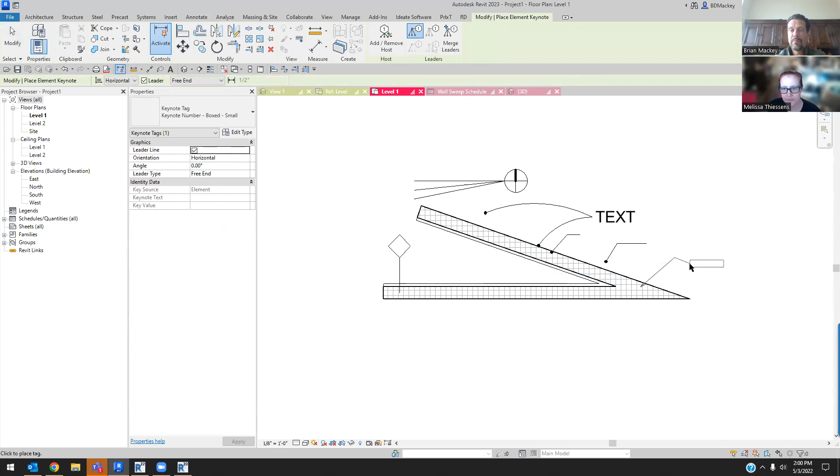You think that they're actually going to have? I guess it doesn't really matter if there's no. Sure, it's a division 10. I'm not worried about what the leader looks like.

Yeah, and then with keynoting, I believe that is under object styles. Because we can't keep things consistent. I think when you go to object styles, annotations, keynotes, it's the keynote tags. And I think this, change the right one.

The bizarre part with the keynote is it's also going to be the border of the keynote. So that's coming out as a default.

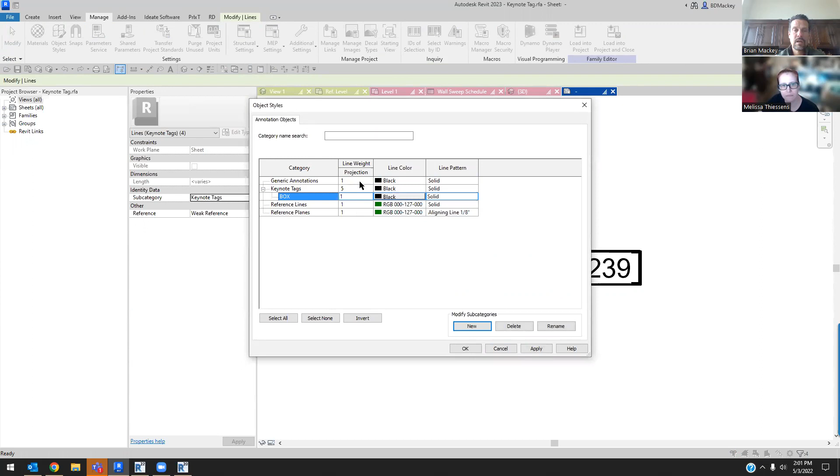If you edit that family, you can create a subcategory of these lines so you can get different line weights. If I grab the lines here, they're just set up as keynote tags. You could go create a new object style. So you'd go to manage, object styles, under keynote tags, create something new, call it box, and I wanted this to be a line weight of 1. That's fine, we'll say okay.

We'll load that in. Oops, cancel. I got to select it and change them, change these from keynote tags to box. Load that into my project. Okay, and then say overwrite, and now I have a different line weight.

So if you're just leaving it as default, keynotes use object styles, so you have to create your box, if you're doing a box, as a different one than what the arrowhead and line are going to be using.

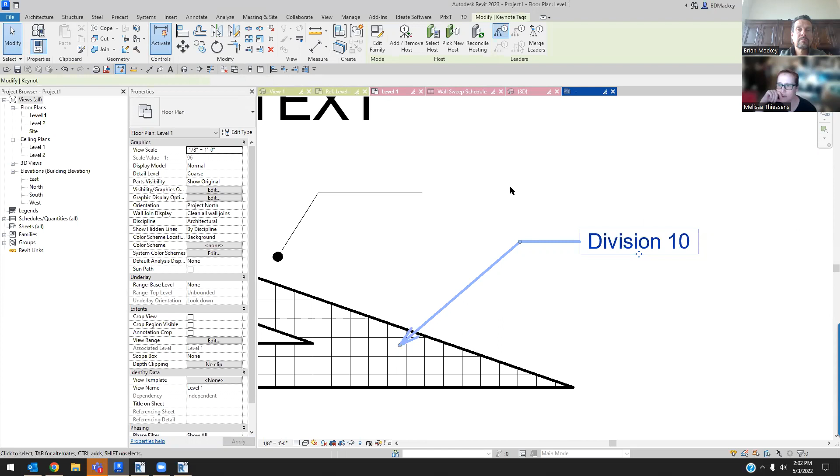If you turn the box on in your text style, is that also driven by the same, just your regular text again? Oh, the text box. So if you make that a box, is that the same? And type... I'm having click issues today.

Could be the fact that I have 4 Revits open, who knows? I'm sure it's not. And then also a zoom. And then a zoom.

I believe the box on the text is the same as well, yes.

So the line weight, yeah. So for text, if you're using a box, it has to be the same as your leader, but on a tag, you can create an object subcategory.

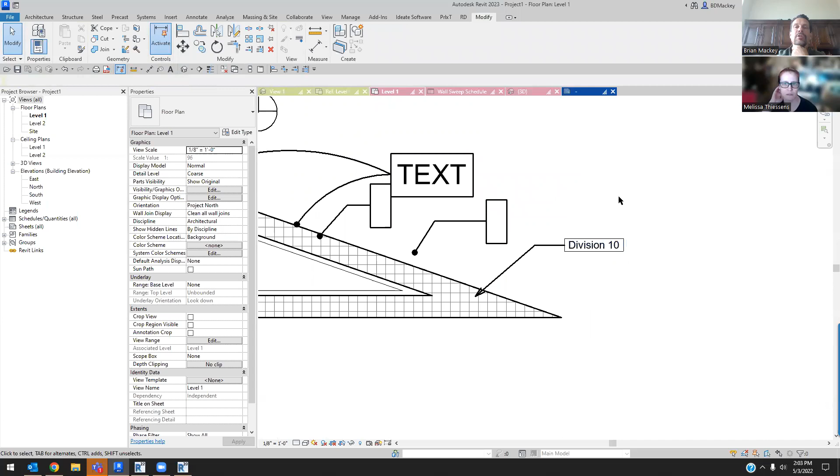Rick's saying keynote tags can have multiple leaders also, right? In 2023 or 2022.1 and newer, yes. And then they do the same thing where it will say 'varies' or whatever you've set up, if you happen to point off to something different.

If you pointed to a different wall, so if I put a wall over here, generic 8-inch, and then grab this tag and do a new host, show multiple leaders, what am I tagging on this? You grab type mark. It's got to be grabbing type mark, right? I thought the out-of-the-box walls had type marks on them. I believe so, and then it'll say varies.

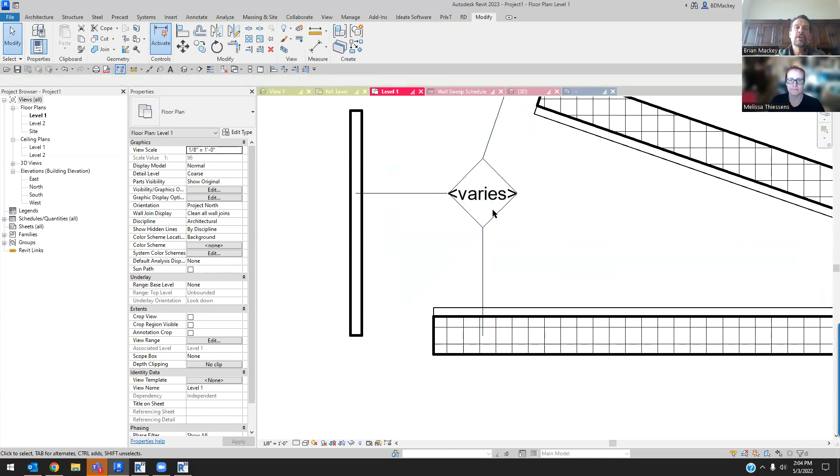You can change in Revit what that says. It was again a 2022.1 feature, under your manage, additional settings, annotations. I thought it was here. Nope, multiple value indications is down here - display varies or whatever you want.

I would put 'you suck' but like, you're doing it wrong. Yes, you're bad and you should feel bad. That might be really long.

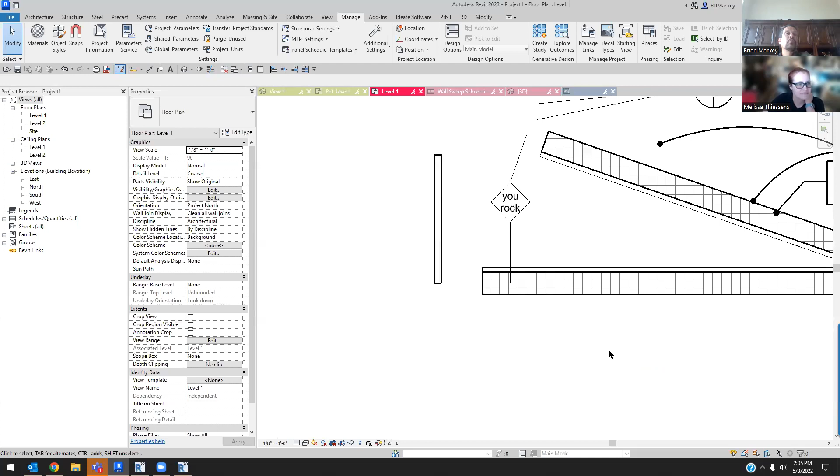He draws a reference plane at the base of the walls where he wants it, and a reference plane at the top, and then attaches the top and base of the wall to it. You cannot use footings for that, because footings will not go on a sloped base wall. So if you're trying to use your structural footings, it's not going to work for that. So I believe he just uses a beam, using that same reference plane to host the beam, and does a beam as his strip footing.

But yeah, so it really starts getting into it, because here's the wall. Obviously this is not 1,000 feet long or whatever, but when you do a reference plane - if I go to architecture, reference plane - that's the slope of your building, it's going to be parallel above and below.

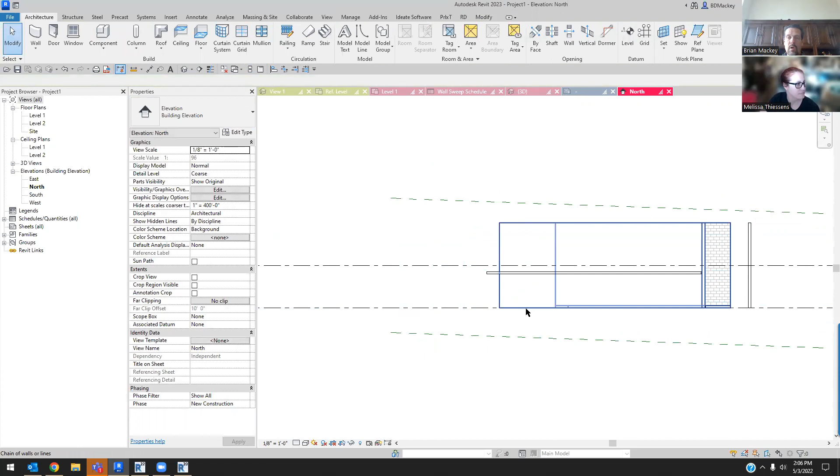So literally he just draws two, and then he takes all of his walls, actually only the parallel walls, the perpendicular ones are still square at the bottom, but he'll take these and he'll just say attach. You do have a top and a base, so you can say attach the base to that, go back and grab attach again and attach the top to that. So then as his design changes, if he moves the reference planes, all of those walls move up and down with it.

He originally started off by doing edit profile, realized that was just a pain in the ass, so this is what he does. And of course, he names all of these sloped top. I can't spell anything, but you get the point. Or slopted, that's fine. So that's kind of the scenario that he does on all of this.

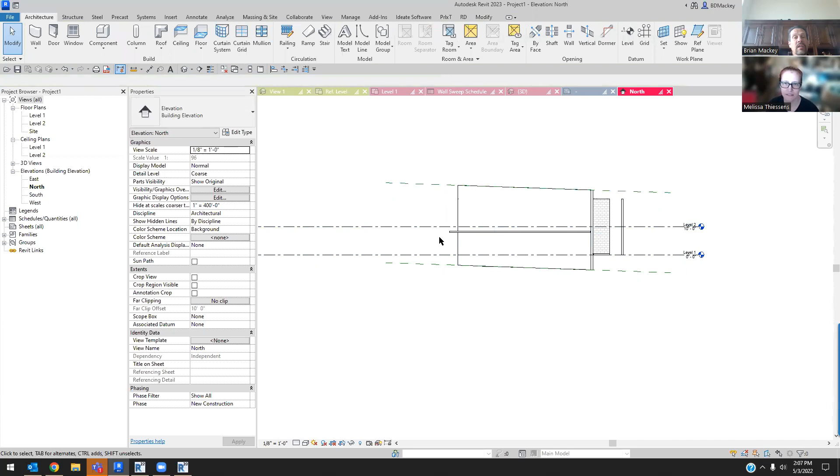And he also will start choosing these as the work plane too. So again, giving this a name, base. I believe even in the floor plan, when he does his railings, because he's got railings as a cow milking facility, he can go set the work plane. That's not what I wanted. He can go set the work plane to be that named, I thought he could do it to a named reference plane.

Oh, he models his floors first, and then he picks the floor. He models his floor based off of that reference plane, and then he picks that floor to be the slope for the handrail. So does he do a floor by extrusion, or does he attach? I don't remember how he does his floors. Maybe he does an actual slope on the floor. He does like a slope arrow where it says all of his stuff is a 1% slope.

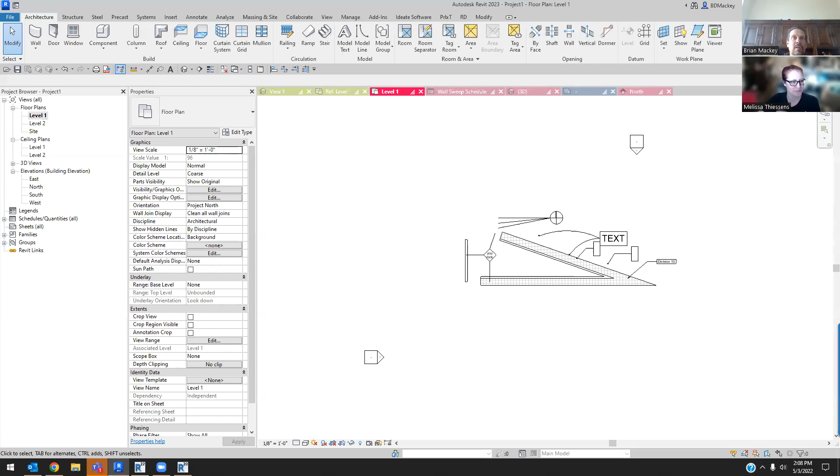It's not like the question came up, 6 foot and 1,000. It's like, no, it's a 1% slope. Yeah, so I think he does a slope arrow. You don't want milkshakes. Yeah, I think he does a slope arrow at 1% or whatever it's going to be. And then it looks like Benjamin had a follow up to that.

So doors or anything, the reveals, you're going to be hosed. If you're trying to do reveals, you cannot do reveals using the reveal tool. But the doors, a door is going to be flat anyway. The door is not going to slope. And again, on that 1% slope or whatever it is, you then just basically have to come in and say, cool, let me move the door. He does this all in 3D or in an elevation. That's where the door needs to go, or the edge or whatever you need to do.

His door opening does cut out the footing or foundation wall or whatever he's doing. So there definitely is some work on doing all of this. But when you are talking reveals, I believe the way that we've done the reveals in his case is we've created a line-based family for him. So let me go load family. Let me go into, I think it's my openings. I've got my reveals. Generic model, opening, or is it called reveal?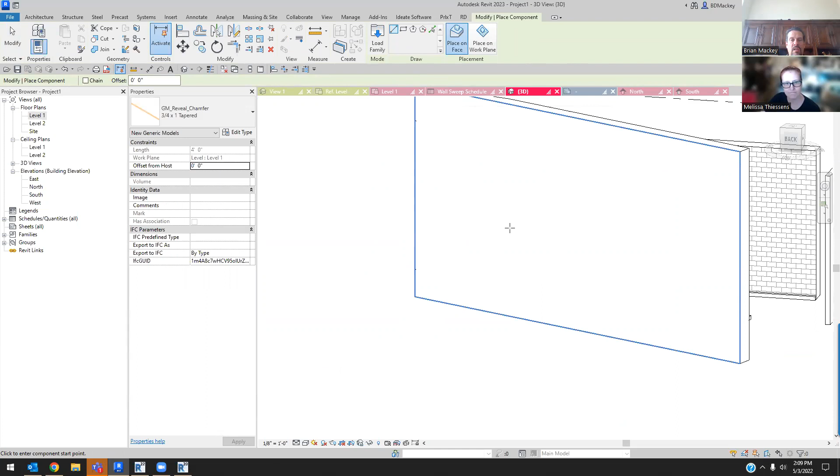Yeah. So this is a line-based family, and part of the reason why we like it as a line-based family is when you go to place this component, he usually does it in 3D, but you can do it here, I'll do it in 3D just to show you. A line-based family, put it on the same wall that's sloping. I think this is my sloping wall. You can just say place on face, and then he can draw this, get it to the slope he needs. Now it's understanding that's parallel to the top and the bottom.

It does not cut it automatically. So there is a process of having to come back and use the cut tool and say, I want to cut the wall by this reveal. But now it's still a line-based family, so he can adjust it, he can move it, he can dimension to it, he can do whatever he wants to do. Doesn't have to be plumb straight. He can do whatever he needs to do on those reveals. Vertical reveals, they work fine, but you can then start going through and looking at all of that as well.

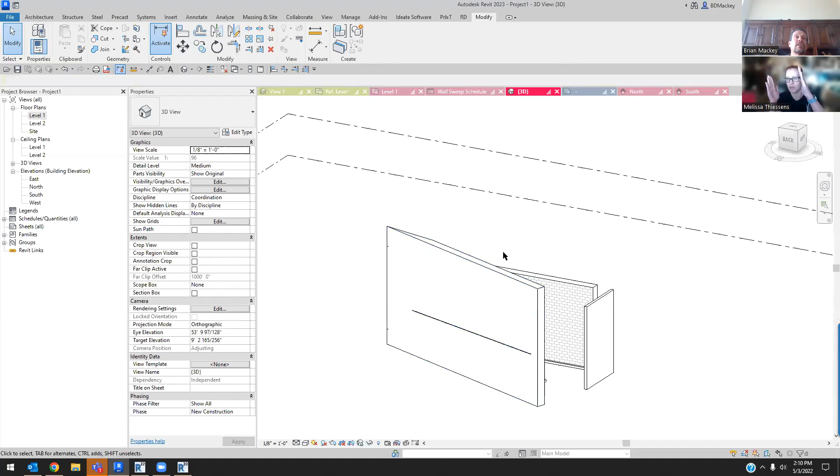So now he's saying if the doors are perpendicular, the door needs to be ever so slightly tilted too. Oh, so you're just sloping the whole building. See, for him, he does all the roofs flat. Ironically, as I think about this, he doesn't even attach the top of these because the roofs are all flat for constructability. So you're saying taking the panels and putting them on a pad, you're putting all the panels on a crazy slope. Rectangle and be like boop.

Yeah, in a scenario like that, I'm trying to think, I might actually create a family that I could just put in and do it with. Yeah, well, because you could just uncheck always vertical in those doors, right?

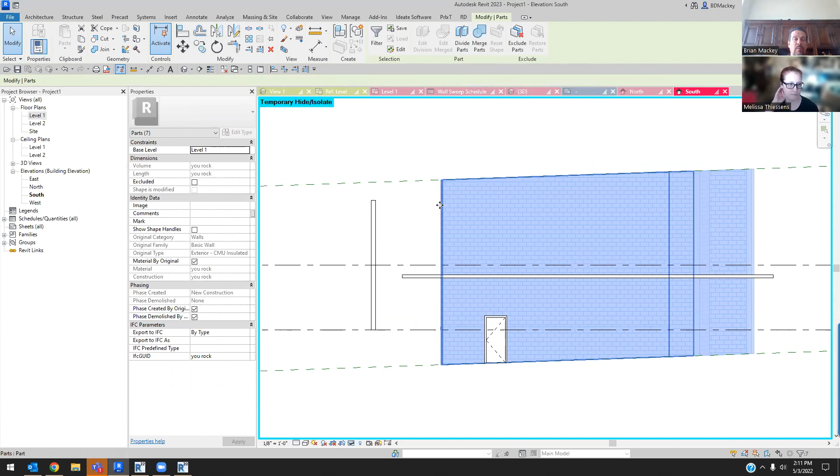Yeah, the only other thought I'm having, and I'm gonna go into an elevation to do this again, would be to part out your wall. Because if you're talking tilt up construction anyway, you could draw your entire wall using this attach, and then you could go say create parts. And then one other thing about when you create a part is it's going to break the part up into all the different layers if you wanted to. So like when you create a part, I'm going to get the brick layer, the masonry layer, whatever.

But if it's just like a concrete wall or whatever, when you do this, you can now say, I want to go divide the parts. And you can divide the parts one of two ways. Let's say pick a plane, not the face here. You can do it one by sketching, just by saying, hey, I want to edit the sketch and I want to go from here to here. I'm assuming I'm going to be somewhat perpendicular. I did not go down low enough.

Right, and then what's cool about a part, when you divide a part, you can also give it a division profile. So if you have profiles in here, you can change the profiles. You can have a gap to it. You can have it offset. You can have it get mirrored. You can have it do a lot of different things with these profiles. And then once you say finish, and then finish again, you're going to see that back in the 3D view.

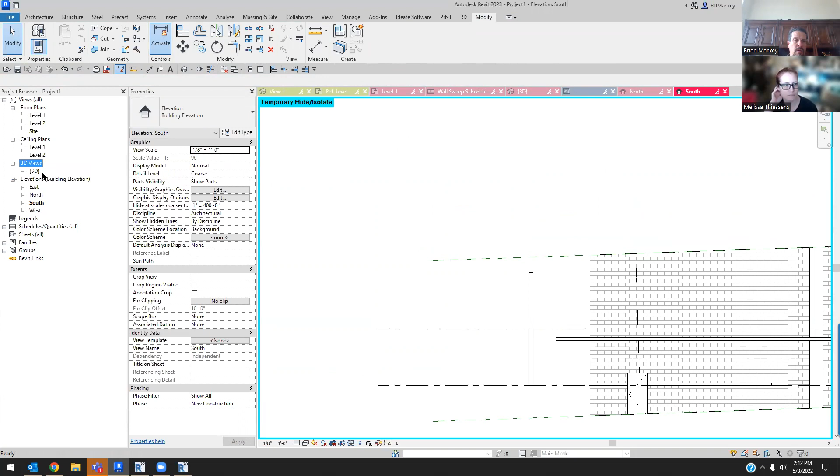I don't know which color I'm on. I'm on the pink ones. You're not going to see anything happening in this 3D view. But if I come up here and say, I don't want to show the original wall, I want to show the parts, you can now see I've got this wall parted out into the different segments. So this might be something else to consider, is doing parts.

I'm thinking I'd still probably create a family, but you can see that I've set this up, and if I actually edit that division, I could say, give me a 1/2-inch gap in that. So since you're talking tilt up construction, there's going to be some gaps inside of there, etc. when you start getting into it.

Well, I would assume that they would be trying to standardize the panels as much as possible. So hopefully only a handful of panel types. Maybe you do just end up building a rectangle panel and then just placing that. Yeah, like I said, the problem with doing that though is now you're going to have to create doors that aren't wall hosted.

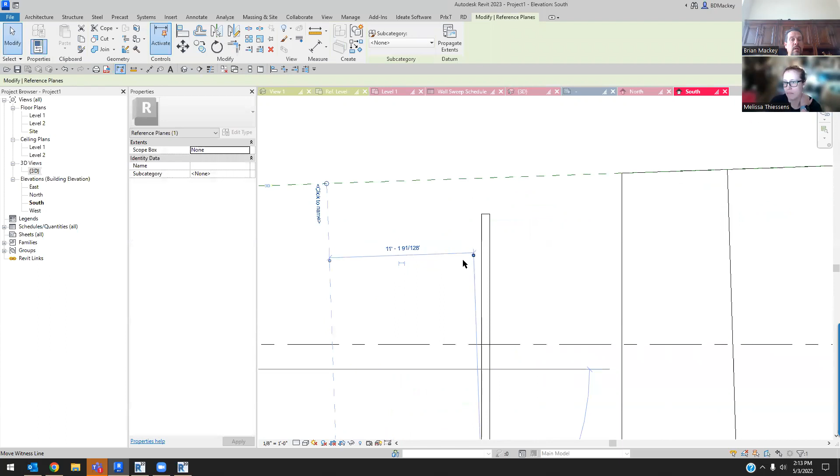You know, the other thing about when you're doing parts is copy multiple. I'm just going to come in here and go to there, go to there. The other thing when you are trying to divide this part, if I come up here and say I want to divide this part, another option is intersecting references. And if you have reference planes drawn on each side, oops, I didn't name them. Use your slopted. My slopted.

Structurally will be parts and assemblies for the panel types. Should have named these. We'll call that one 1. We'll call this one 2. And now when I divide this part, I go to reference planes.

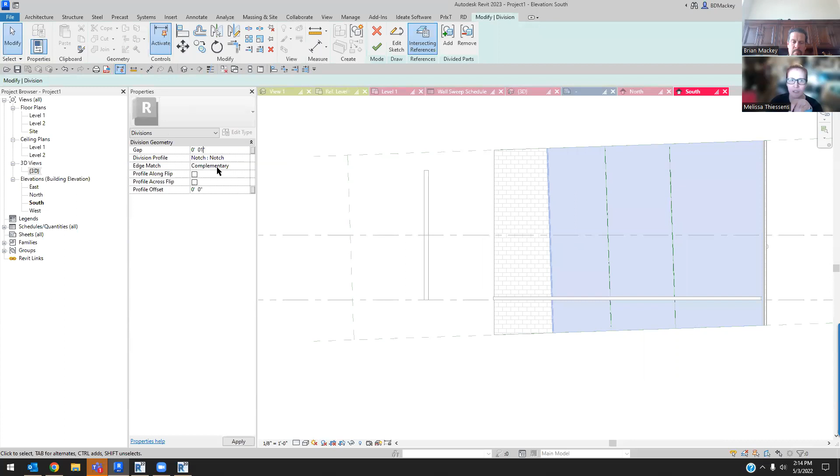Well, and just while you're doing that part, at my old firm we did a lot of tilt up as well. So sometimes we did a reveal family that also was a joint family. We also tried out doing split with gap, because that will actually put in your joint, the inch or whatever you need, and still keep everything locked together. So you could still move that wall. It's one thing.

And then we also played with using a curtain wall, so you could have some mullions that were your joints and some mullions were just reveals. Yeah, exactly. And just placing in the concrete as the panel.

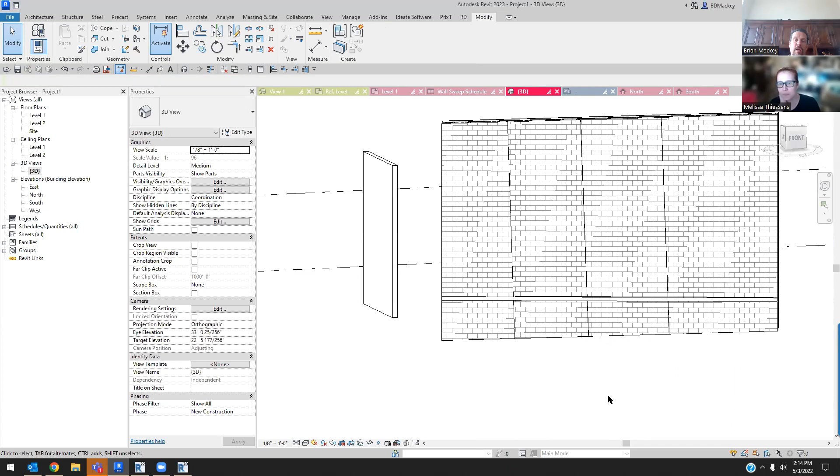So, but if you're then talking that your door needs to be put at that angle, you're going to need to probably create a custom door, because I don't even think in a door family, like you have always vertical or anything like that. Yeah, because I'm totally in a door family right this second. And always vertical is checked. Is it? I think it could be. I assume you could uncheck it. I don't know. Let's find out. Let me open it, do it, and uncheck it.

No, nobody seems to be running away. So everybody's like, what is this craziness he's doing?

Yeah, for my client, it's all stick or metal frame construction. So when they get into it, I think the roof is stepped and it's flat, because everywhere they step the roof, they use that for venting.

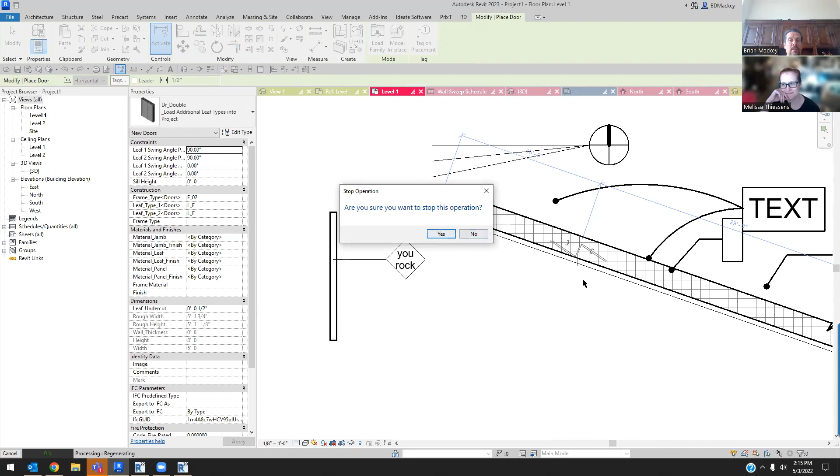Because if you really wanted to know something bizarre, cows produce a crap ton of heat. So even when it's below freezing, you still have to vent the whole buildings, because cows produce so much heat that they will actually overheat and die. Well, and probably crap ton is actually the right measurement for cows.

Yeah, see, it's not even going to let me. Okay, so would it have to be work plane based instead? I think you'd actually have to create one that allows you to programmatically put in. I have a window that I can do trapezoidal like that, but it's all custom. No, my view's not parallel to that wall. Oh, which is why the rotate didn't work. There you go, being smart, Rick.

Sorry. No, sorry. Don't apologize for being right, Rick. Come on.

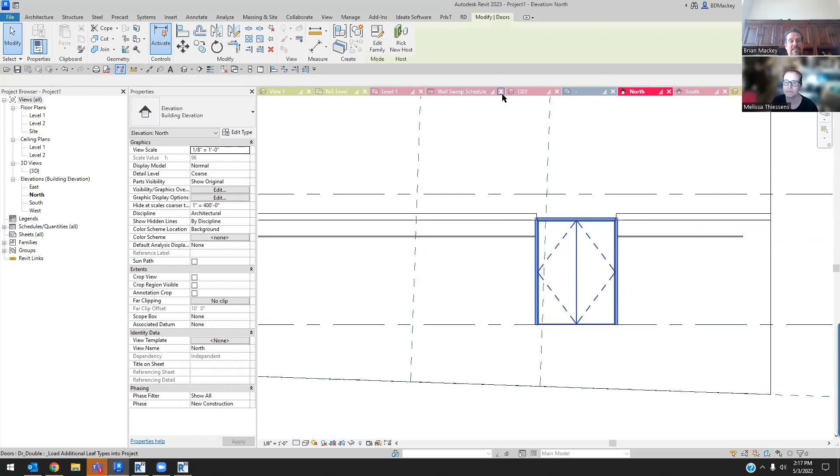Yes, and he was also saying, could you do that for the wall up to the underside of stairs if you lock a reference plane? No, the underneath side of stairs cannot be chosen, so if you were to put a work plane at the bottom, or a reference plane. Yeah, so I think you have to, well, let's see, I've got the door family open. Attach your wall to that reference plane.

And so if we say this is going to be work plane based, yeah, you don't even get work plane based as an option for doors. It wouldn't actually be a door family. Yeah. Or you create a door family. Like I have a window family where I can change the angle of the tops, the bottoms, and the sides. Because you get architects like, oh, I want a trapezoidal window. I think you'd have to do something similar to that. Do you think you could start out with a generic model or something to make it?

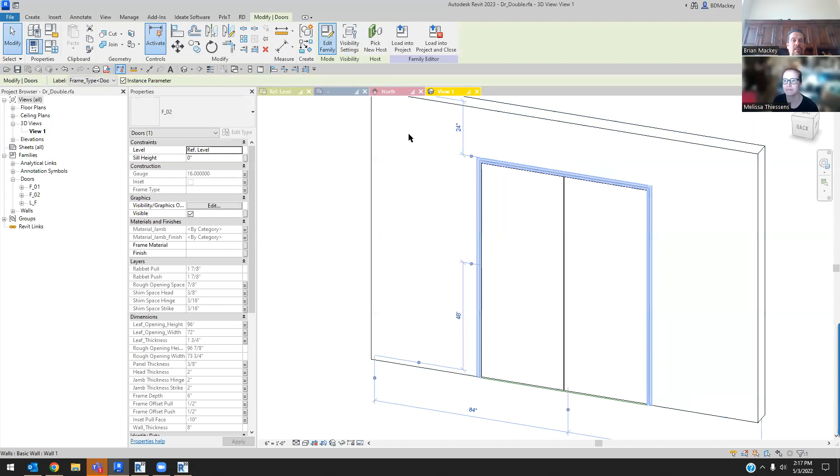Well, and I wonder if it's because all these have nested families and all the nested families are then set to be always vertical. Yeah, I don't know on that one. Whatever it's going to be, you're going to need a custom ass door family. That's all I got.

Yes. No, Rick's question was about if you were to take a reference plane and draw that under your stairs, and then you could just attach your wall up to that. Yes, you could do that, but then it's not going to update automatically. Yes, you would have to keep updating said reference plane. Yep, and that's why I like doing the handrail for that theory. Yes, you could absolutely do that.

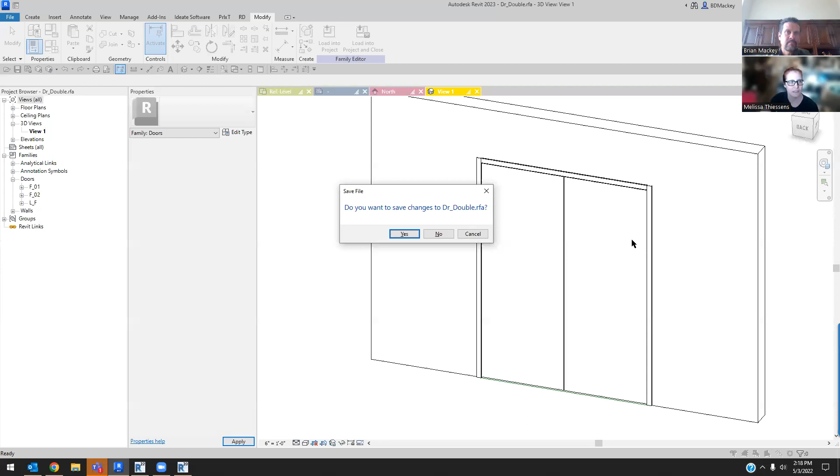You can also attach walls. It's funny to me, especially if it's on something curved. I get a lot of architects who draw a curved half wall, like around a ramp, and then they want that to be attached 6 feet above the ramp. So what I actually do is I draw a sloping roof that I then do a cut profile in plan. I make it my wall cap or the top of the gypsum board, and then I attach my wall to the roof. But I've also done a vertical opening in plan. I totally did that just in the house I've been helping model for a friend.

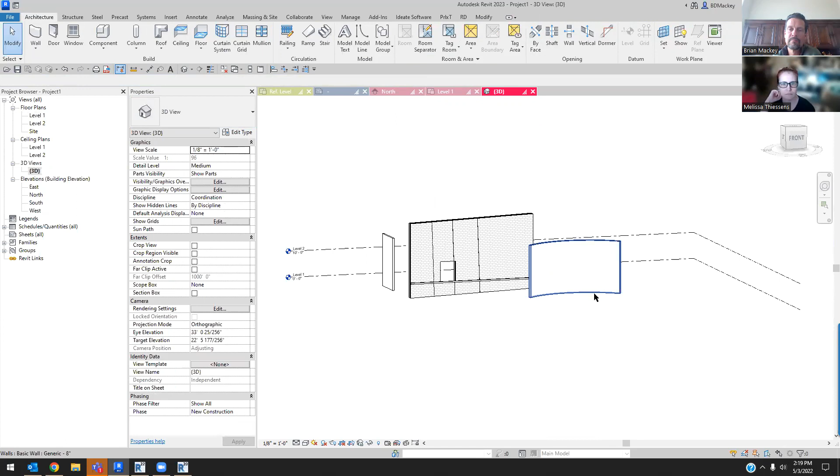Although I've been wondering, I haven't upgraded, but can we do curved walls and also edit the profile of those now? No. 2023? No. Still no curved walls and editing of profiles. For some reason, I was thinking that was a change, but maybe I'm thinking sloped walls, not curved walls. No edit profile, could be because I'm not in a 3D view. But no. Okay, I must have been thinking sloped walls.

Let's see. Okay, and we should look at Casey's now. We're already 20 minutes over. What's another 10? Look how much fun we're having.

So, would you know of a way to have the element tag change colors if the 3D modeled element is a generic size, specifically columns, beams, or piers? We're trying to figure out a way to have the tag automatically change from a red color when using a generic size to the normal black once we set a true size.

To change the color of a tag, no, you can't change the graphics. You can't use the graphics of something visibility-wise. Paul Aubin actually created a very fun workaround where he did a text parameter, and then he used Wingdings, it was hilarious. So he did a text parameter that basically said, hey, if it's this, then put up this text, otherwise just be blank. And what he actually did is use Wingdings.

He did like an uppercase R and an uppercase D or whatever. So in Wingdings, it was a big can't-do symbol, and he made that red. And then he found the Wingdings uppercase letter D or whatever it was for a green check mark, said, hey, here you go. So he basically did something like that, but you can't change the color of the box, at least not to my knowledge.

I've never seen it. But he did actually have like a little red circle versus a green square, like, hey, this has been updated, and you've gone through, and he tagged it all with that. So he does have that. It was on one of his LinkedIn tips in the previous few months. And he also did it at one of the conferences. I think it was Midwest U a couple of years ago.